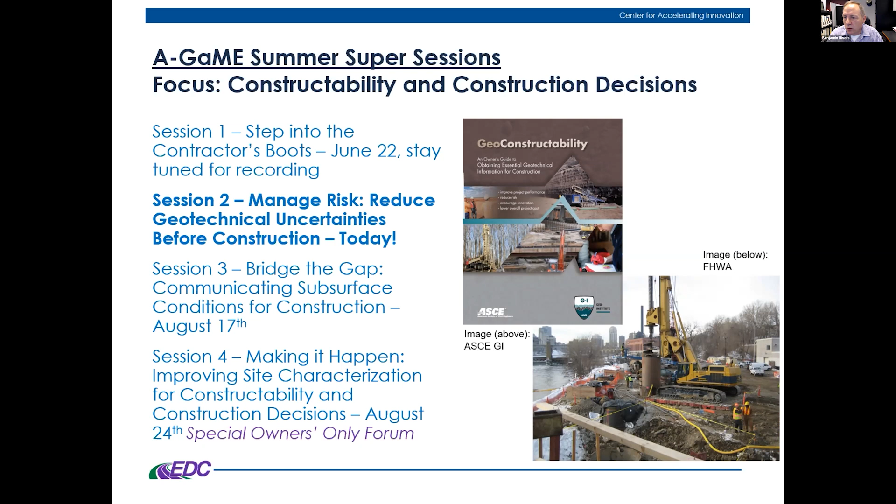We do have a few coming up: bridging the gap on communication, communicating these for construction needs, and then finally a forum that is specific to owners - it's really a workshop atmosphere where we're going to find out where our gaps are, where we need to improve our processes and procedures so that we can incorporate these construction needs for our investigations.

So for today, what we're going to be talking about are those common problems that we do experience during construction related to geotechnical uncertainties, and some of the problem-solving applications, the characterization of our conditions using A-GaME technologies, and then case histories that illustrate these points for both A-GaME technologies and the types of problems that we have.

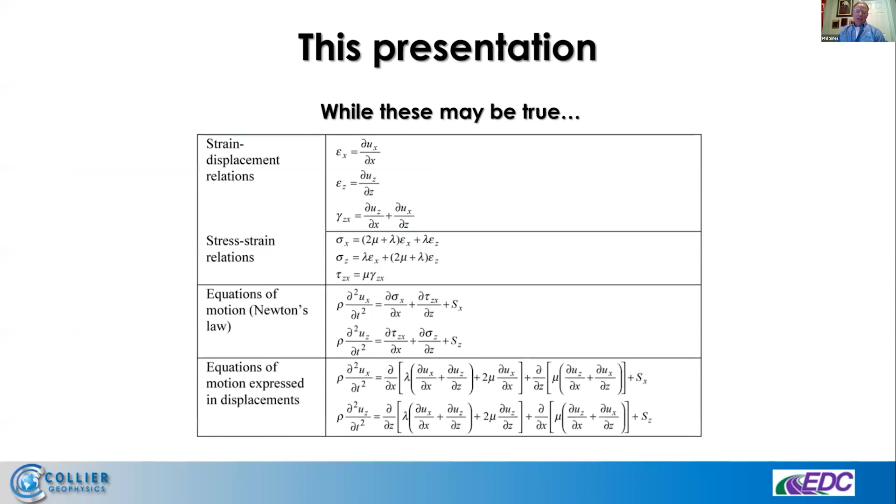The real key is, where are we going? What's the goal here from 2022 going forward? We're talking about a couple of decades of getting to the point to reduce uncertainty in geotechnical investigations. I'm going to get into several of the formulas and how we get there, but no, I can't do that in 20 minutes. I don't intend to, but we do know the physics is there. We do know it hasn't changed.

What's changed are three things I'd like you to be aware of. Our hardware's gotten better, our software's gotten better, but the key is our digital recording and our digital visualization and presentation of results for you, the designer, to incorporate geophysical results into all your programs, whether it's ArcGIS or any other 3D CAD. All the programs out there, we can give you data to put into it. I think those are the biggest changes, not the physics.

So I'm going to spend just a little bit of time on a statistical perspective and some corollaries, and then I'll get into those methods. I'm going to tie those methods into what we know as uncertainty as geophysicists, and then I'll have some applications to back up those methods.

Because in reality, you know, we start on a site, and this is just hypothetical. In this case, it's a quarter square mile, and we're just putting in a 50-foot anything. It could be an old river channel, it could be a dike, it could be a fracture in bedrock or a shear zone or faults and things like that.

And if we assume that site and say, all right, it's a narrow target, how are we going to find it? Well, we drill, or we get cones, or any other excavation intrusive methods. The probability of finding it is very low from the get-go if all we're doing is just drilling and poking and hoping, as I like to refer to it. And we up the number of borings, we up the chance of hitting it. Now we're at 50-50, and that's usually not good enough for constructability and or design.

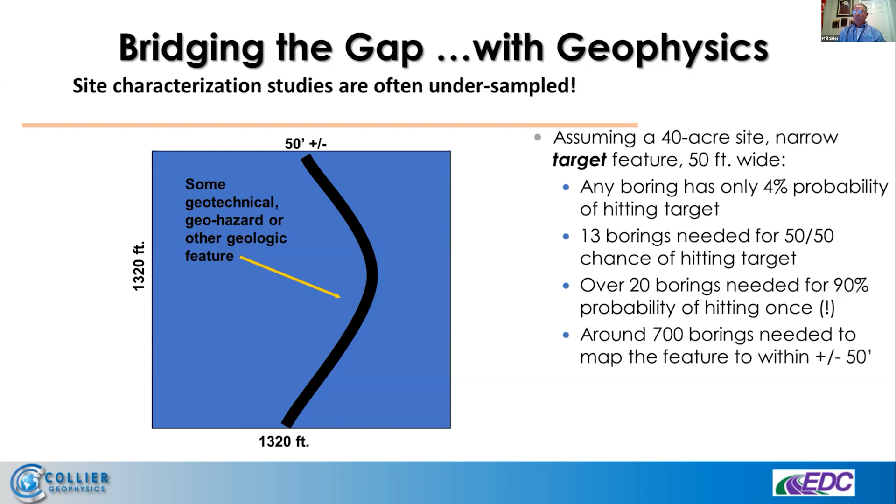We start throwing more borings at it, and okay, we're getting pretty close to at least hitting it and understanding it might be there. But then at some point, yeah, we know we're going to get this. So we're going to drill enough holes and pepper the site, we're going to have enough intrusive investigations. But at this point, it kind of turns into this old corollary we've all seen, the classic blind man and the elephant problem.

And I said, hey, that's out of scope, we can't go there. No, I was teasing.

I explained a little bit about it, and we don't do that today, we don't do that with you, but we know how the physics of these things can come in so that when we analyze the Earth, we know what we're doing is an indirect measurement. I'm not touching it, I'm sampling it with various physics. Those methods of measurement are going to give me properties of the subsurface in whatever fashion I choose, this one being an example of seismic.

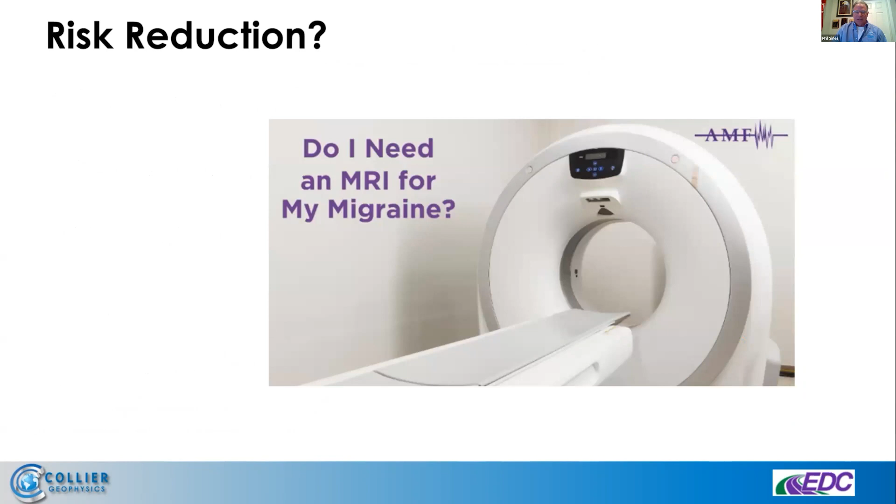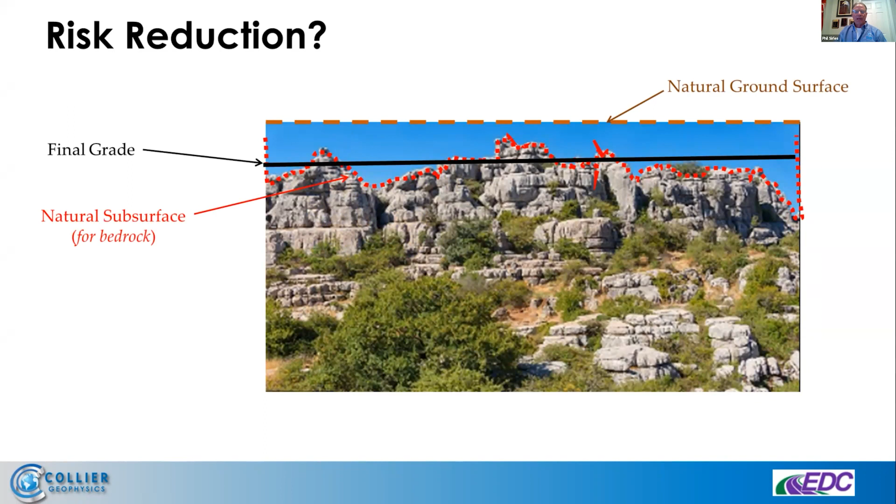So how do we reduce risk? Well, if you've got a migraine, you might say, hey doc, do I need a full-fledged MRI? We don't know. You go to a site and say, do I need geophysics? I'm in karst terrain, what might be there? Well, the short answer is maybe not. But if this happens to be the natural ground surface in a nice flat part of the country, and we say, hey, there is subsurface karst here, we don't know what it looks like. It tends to make a difference when somebody comes up and says, my constructible grade is at this elevation. We have to understand it better before we get out there, because you can look at that and say drill here, drill there. What am I going to do?

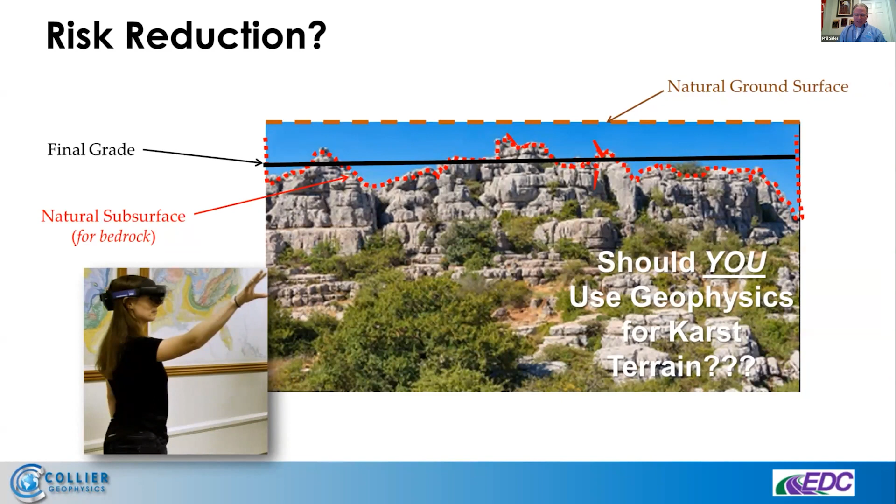So the question isn't, do I need geophysics? It's, should you use geophysics in these kinds of environments, geohazards of any kind? This is just one example of karst. And my short answer is, well, you don't have to. If you're like me, one of my geophysicists here that's got the force, using these geophysical goggles - these are HoloLens - and we are developing with several companies the ability to take our data and get into the models, get into the subsurface, as I like to put it, and see our data. So here's the opportunity to use those technologies.

That MRI is going all the way around your hip, knee, head, whatever it is you're looking at. And they have a terrific starting model, right? Most of us kind of got the same shape, size of head and what's inside of it, and zillions of examples. And they get really quick time differencing—they can do that imaging over and over again in a repeated short time frame.

Well, we don't get 3D coverage. I'm lucky if I get a borehole to put sensors in, or an adit, or a shaft, or anything else under the ground—I'm typically just dealing with the surface. And even as a geophysicist, when I say 3D, often it isn't 3D like you might think a CAT scan might be. I hardly ever have a really good starting model. I say it's rough, because that's why we're being brought in—a borehole here or there, or maybe not yet; they're going to use them afterwards.

And every site is different—let's just admit that. Mother Nature can be pretty tough on us with those changes in site conditions, and those can change even during construction. Just moisture comes to mind, or flooding, those kinds of things.

So the real piece is that when they're used properly, and you incorporate other test results—remember, the doctors do too—then you can start to incorporate them and reduce the uncertainty in your own model. That will help the geotechnical folks and every designer and project manager reduce that uncertainty on your site and the risk for your project. So geodata, and geophysics being one of those, is really where it all can come together. We take anything that's given to us on a site and incorporate it into our data so we can understand what those colors mean.

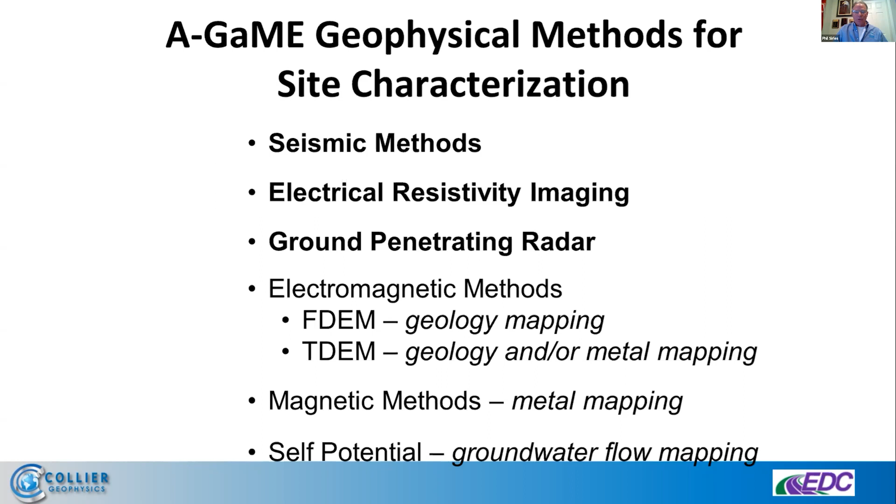So for seismic, I've got a couple slides of basic concepts. We're measuring all the vibrations going on in the ground. We can do that passively by setting out systems and just listening to what I refer to as planes, trains, buses, and cars—the ground is shaking. Oh, and by the way, there's earthquakes and microtremors too. But we do that with sensors, and we can do it in linear arrays or grids.

These are good because they give you, if you're not aware of the phenomenon, an elastic wave traveling through the Earth and the wave fields it creates. There's two types: body waves that travel into the Earth and surface waves that travel along the surface. It's not too hard to follow that intuition.

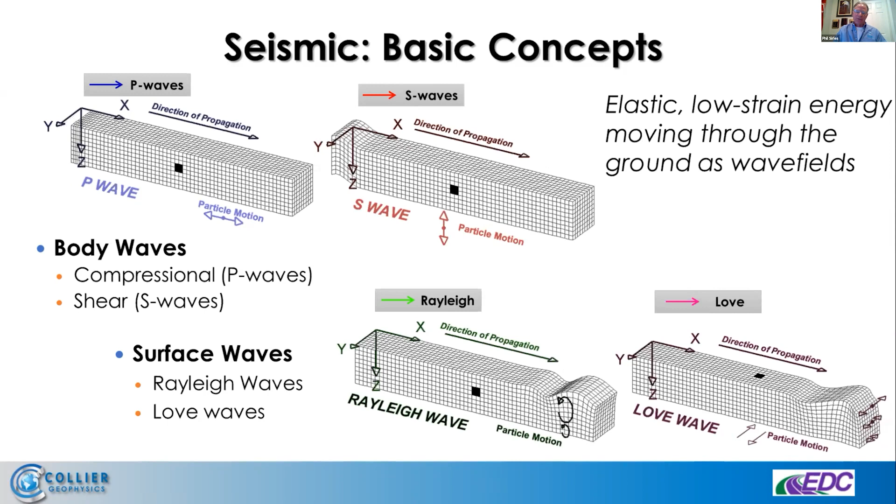Compressional waves travel the fastest, shear waves travel the next speed, surface waves are the latter. Rayleigh surface waves travel at the same speed, they just move the ground differently, one in a vertical sense, one in a lateral sense. We know these, we know the physics, and using these is how we can go out, design a survey, use the right sensors, use the right array, and get the best answers.

Well, the reason any of these work - I'll have one of these slides for each method - is if there isn't a contrast in Earth materials, we can't map it. A hard rock on a hard rock, a dense soil on a stiff clay, those kinds of things that as geotechnical engineers we can't see those contrasts and interfaces if they don't have a change. In this case, going from the really loose, crappy landfill stuff all the way up to steel.

We know how seismic waves travel through water - ask any mariner that's doing pinging for other submarines. So we can use this to start saying what kind of Earth materials and what sort of range of materials, velocities, we might expect.

On the GPR side, basic concepts - this is an old slide again, there are new systems, 3D systems, lane-wide systems. I just wanted you to get an example of what can be done at highway speeds when we're looking for rebar and cracks in concrete, when we're looking very deep with these low-frequency systems. A colleague of mine in Boston went to 130 feet last week with one of these. These are also geologic mapping tools.

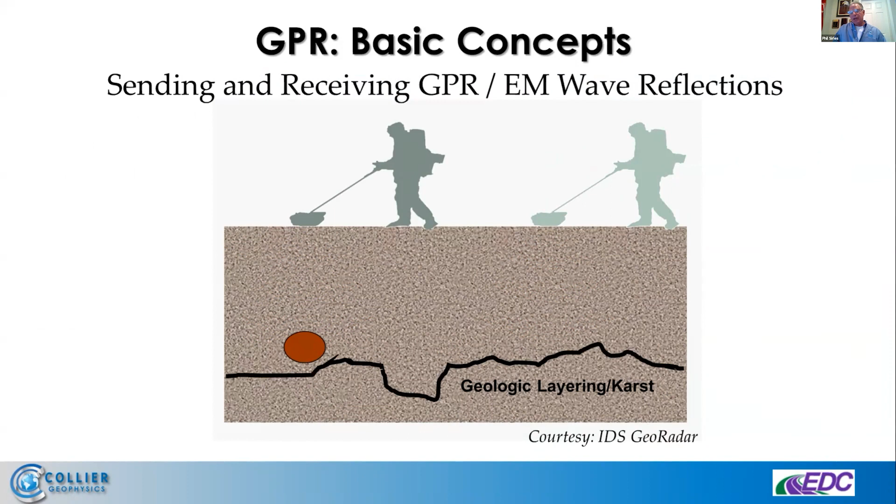It too has contrast - they're in dielectric constant. Not something most people are familiar with, but we have it basically set for extremes from a 1 in air to 80 in water, and Earth materials are all in between.

The best way to look at this is from good materials to use radar in, to bad materials. I've used the phrase - I've been wrong because the clay is not a clay - that clay is the death of radar. It's pretty close to being an accurate statement.

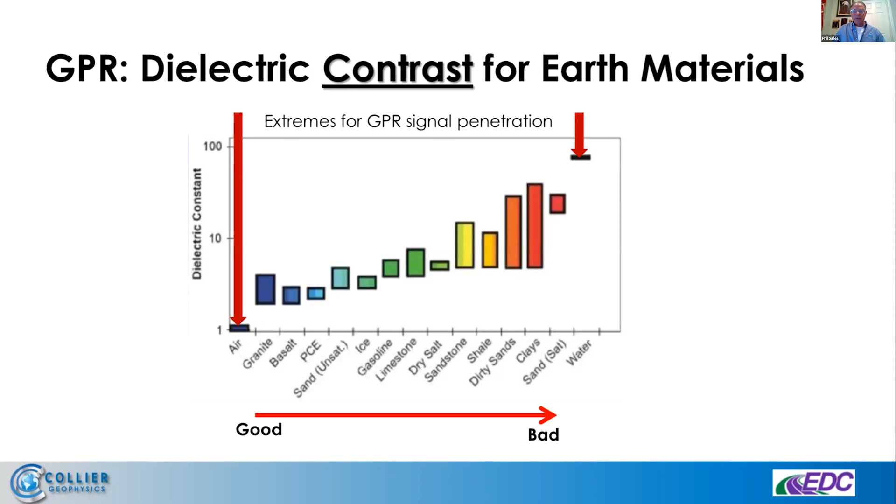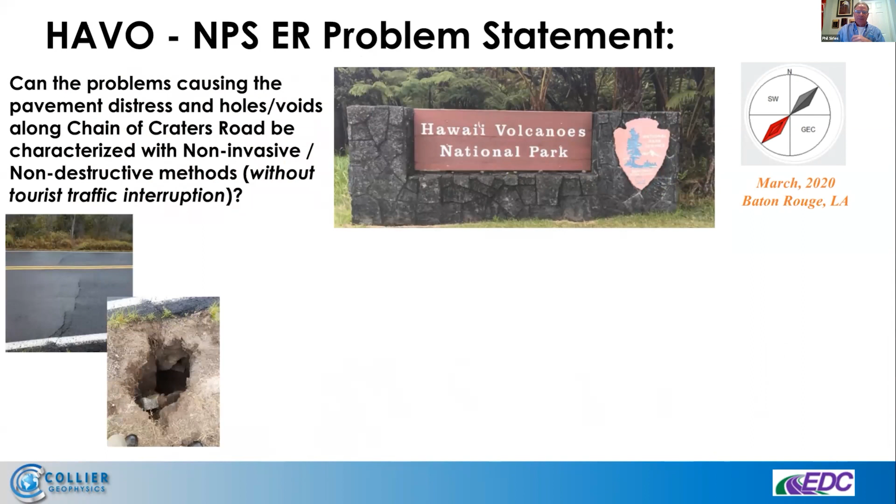So what I decided to do is use a project that was run by Central Federal Lands here out of Colorado. In Hawaii, after an earthquake, they noticed some distress on the roads, some holes that had opened, and they needed to quickly get after a fix. Also, all my presentations - before I forget - this was given at the Southwest Geotech Conference. These full site case histories can be shown to you later.

So here we go. I've got a project with two methods, seismic and GPR. So one project, I'll kill two birds with methods, just kind of showing how they work. Because we had to deploy quick, we had to find lava tubes, we had to do volumetric work, and we had to be cost effective because the smaller - oh wait, that worked for both of the methods. So we went out to 5 different areas.

So the seismic results, unlike the cake show where I tell you what we're going to do and then you get to eat the cake in about 5 minutes, this is the 3D volumetric assessment of this area 2. And this is an anomaly.

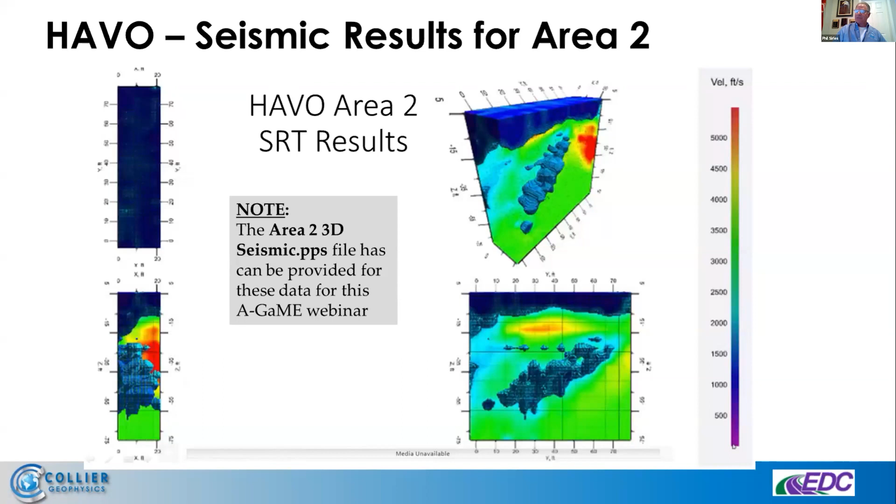It's going quite deep, about 55 to 70 feet, depending on how you look at this and how you smooth it. I'm in cross section here, looking straight up the road, looking down on the surface. The top 5 feet, geophysics isn't real good in that, so it's not a problem for seismic. This is a file I can provide for you, Ben, and everyone else.

At about 5 to 7 feet, we started losing any trace of it, but we could tell it took off in this direction. So in the end, using the GPR for the shallow and the seismic for the deep showed where that void was, right on the shoulder at the white line, open, and we could stick a tape in 25 feet, extending much deeper and across the entire roadway.

So the results here were useful for Central Federal to move quickly. My former friend Camise, who worked on this project, said they got it done in less than 30 days from when these distress features showed up. They didn't drill it — they used the geophysics to make a design and get this thing back open and safe for the public.

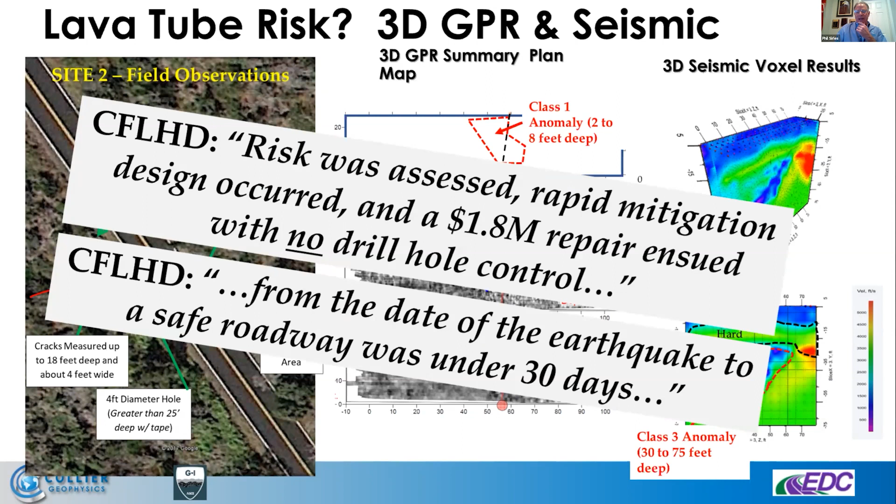One more quick example of seismic, and I'll be running out of time here — I see Ben, I'll go quickly. This is a recent project in March with snow on the side of the road along I-70, just west of where I work, for a wildlife overpass.

A bridge is going to be built and borings were done, but the borings were pre-designed, so they weren't sure where the foundation elements might be. So we did some seismic.

Here, passive testing used trucks and a front-end loader thumping the ground. We used shear waves to show that if you're just using refusal and blow counts, it probably wouldn't be much different whether you're going to be able to found your elements outside of where the existing borings are.

This quote, 'between, below, and beyond,' comes from where Ben works, in the southeast center, from a gentleman named Barry Berkovitz. I've loved that phrase forever — between, below, and beyond boreholes. This is an example of that.

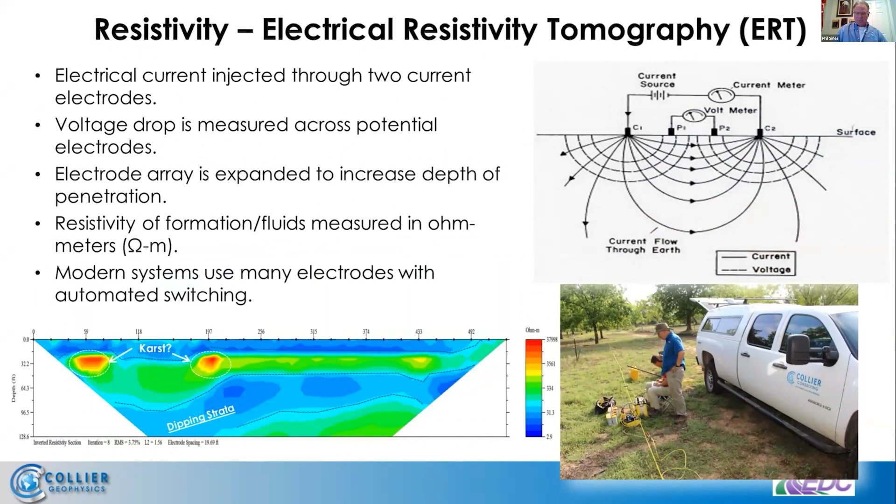Resistivity — I'm sorry, I'll run over time a little bit, Ben, I want a good example. We inject current with a couple of electrodes and receive with a couple other electrodes called voltage potential. Then we can map features in the ground using systems that can cover miles a day in some circumstances. But they all rely on a contrast in earth materials, or this wouldn't work. For those used to resistivity, the inverse of that is conductivity.

So we have changes in material contrasts. That is why it works.

So this is a project that I presented at HGS many years ago, looking for karst in Oklahoma on Highway US 412, separated by 2 counties. We were looking for these zones of

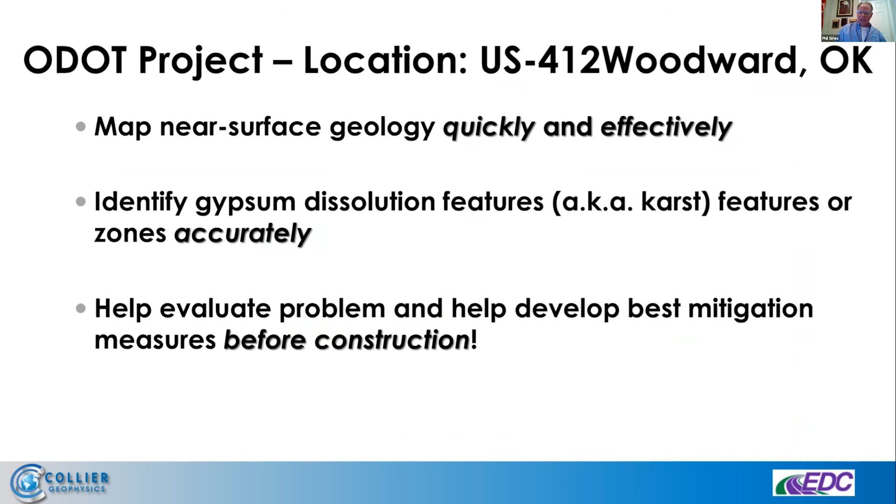gypsum dissolution, and it was being done so that we could find how they could take a 2-lane road into 2 separate 4-lane passes.

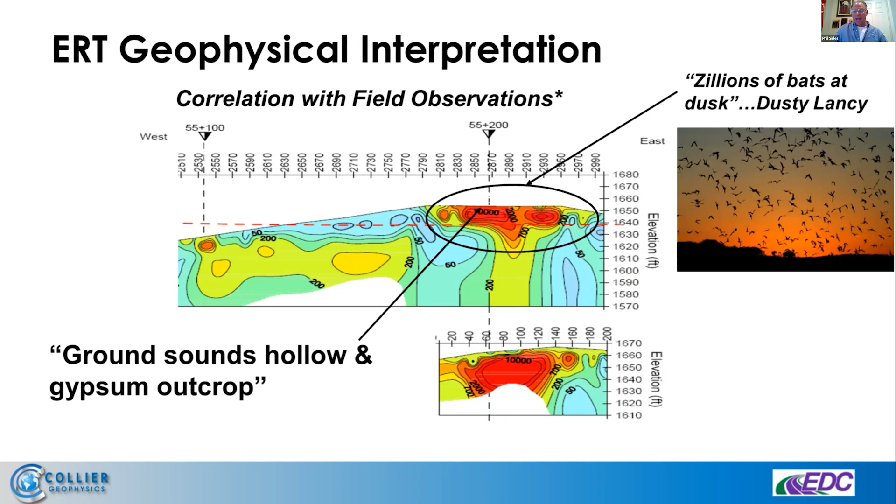So the key for us was to get this data, go through some geophysical pieces of statistical analysis with the geotechnical information, come back with a more easy solution to utilize and understand.

So my last couple of slides here, this is where I think the A-GaME is going. This is an active initiative by the Corps of Engineers to say, we've been using geophysics over here in all of this part for a long time. Maybe we ought to think about bringing it up earlier into the process.

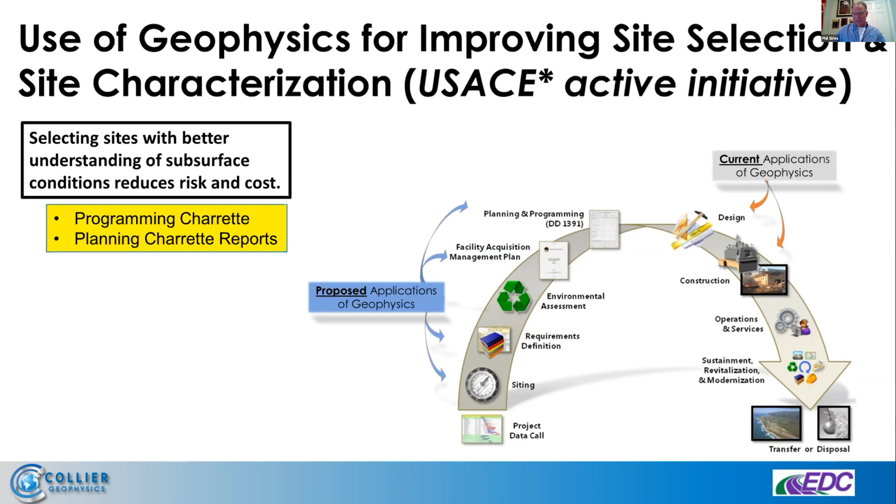Environmental did this in the 90s, right? It was over here as well. When you hit something like a wetlands, you kind of dealt with it during that project. Now you can deal with it earlier on in the programming charrette or early in the planning reports. And I think that's a real key, and it's a good tie to what the A-GaME is doing right now.

Lastly, I just say, hey, you've got to work within a budget, but I think we all have to plan as if unknown conditions might exist, as the owner at this site where a dam was built thought they might exist. So sure, geophysics should be used. I'm a contractor, so I would always say that, right?

But for large areas, if you need continuous information and you only have a few borings, you've got to optimize where to drill further and reduce uncertainty. These have to be used when you're in rugged terrain, wetlands, and environmentally sensitive areas. So there's a reason I say yes, use geophysics, but I believe the reason is really to reduce your uncertainty and lower the risk to project scope, cost, and time.

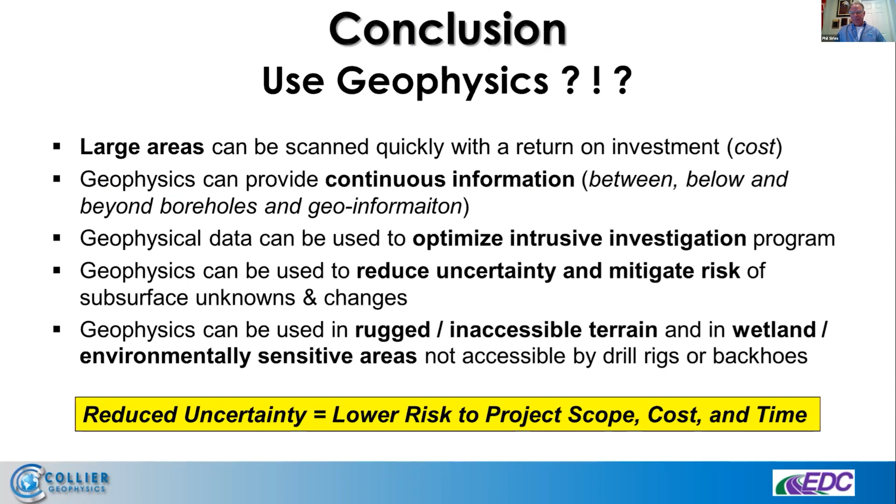So I'm sorry I'm a couple minutes over there, Ben and crew that's following me, but I do appreciate the opportunity to share today. I hope I hit the notes for a few of you that make this understandable and usable on your projects.

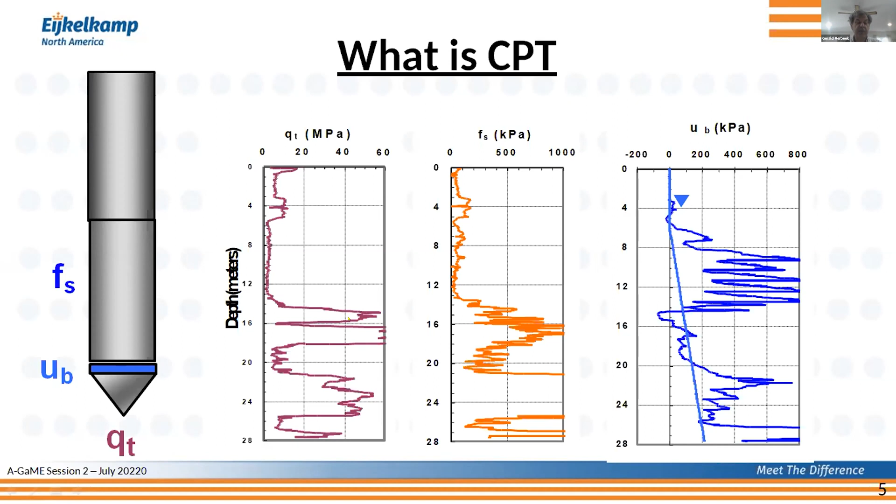You see every single detail, not a data point every foot or every 3 or 5 feet. No, every centimeter, every 0.4 of an inch, you get a data point, and that means you can really catch everything that's going on. As you can see here in the tip resistance between, say, 14 and 16 meters, you have this high tip resistance. You can actually notice that. So what do we do with those data points? We basically look at them, since we have three data points, most of the time initially in groups of two.

Now, to me, that makes perfect sense. I don't necessarily need to know what the soil is. I want to know how the soil behaves, because when you put a foundation in the ground, that foundation cannot look or feel or touch either. That foundation derives its bearing capacity from the behavior of the soil. So it makes perfect sense that we start looking at how the soil behaves rather than anything else.

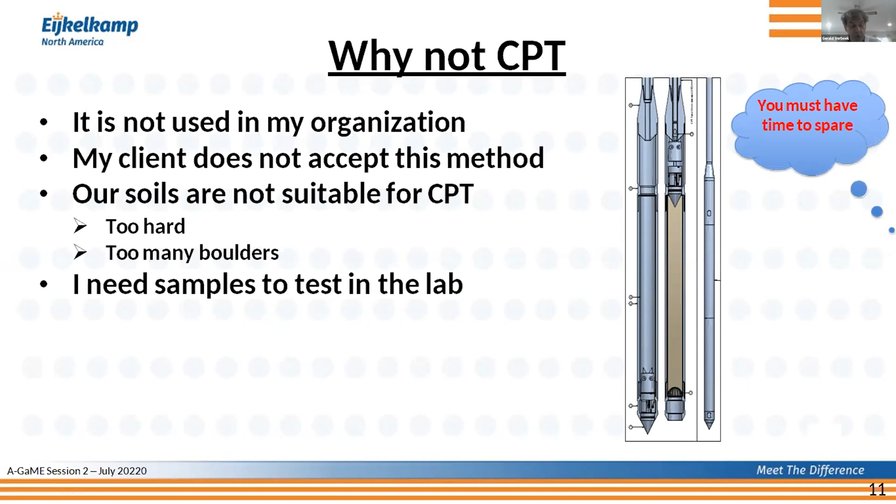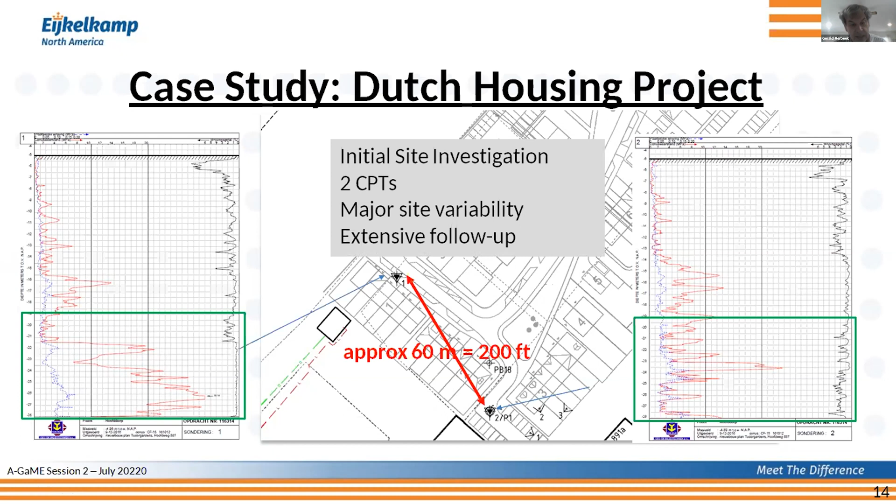Yeah, let's have a decent amount of CPT. Now, mind you, every one of those CPTs will take you roughly about half an hour to perform. But they agreed on doing 22 CPTs, so about 11 hours worth of work, a day and a half or so. And the conclusion, unfortunately, was that when you start looking at that red line, if you take those CPT soundings and put them side by side, you get something... I'm going too fast, let me go back here. Red line, if you put those soundings side by side, you're seeing there that there are lots of question marks, you really don't understand how the profile is going.

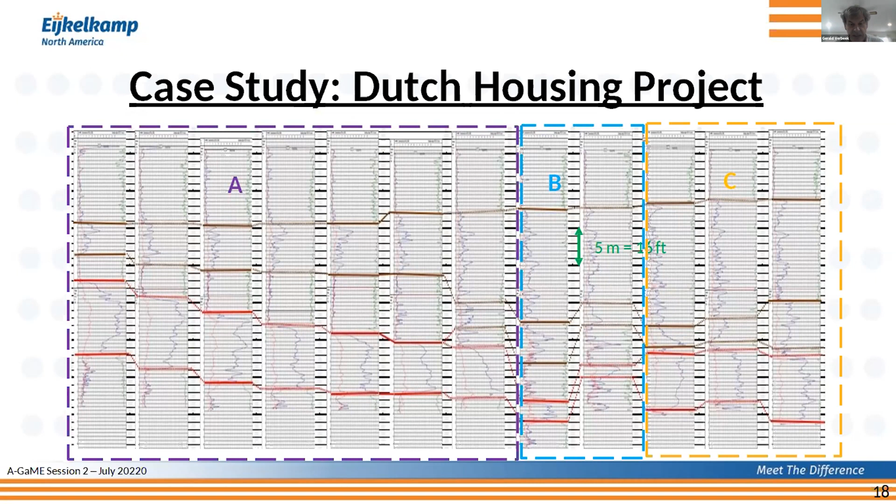But remember, the data could be sent straight away to an engineering office. You can look at it in real time. And based on that, before the guy demobilized, it was said, nope, we're going to do some more. In the end, they did another 22 CPTs for a total of 46, which basically means you did 1 sounding for every 400 square foot. And with that, we were really able to come up with a very good understanding of what the soil profile was there. Very detailed analysis, but with the information available pretty much straight away.

Because of the analysis, we could identify three different zones in that small area. Area A had a very clear soil layer—here the tip resistance is shown, with a clear, thick layer where you can put your piles in. Area C has the same thick layer, but deeper than in area A. In area B, there's no layer suitable for end bearing, so it's all friction piles. But now we know what we have, so we can design the piles and everything goes smoothly.

Let's assume we had not done this extensive site investigation. Let's assume you did your borings, and three weeks later you get the lab results, and it's really not a good time to go back again. What would then be the case?

If you had based everything on location A's data, you would have assumed that already at this depth you start having a load-bearing layer. Therefore, most of your piles would have been too short, resulting in foundation failure. On the other hand, if you had based it on location C, the opposite would occur—most piles would have been way too long, so you'd over-design your foundation and also have problems with pile installation. That brings me back to the construction manager.

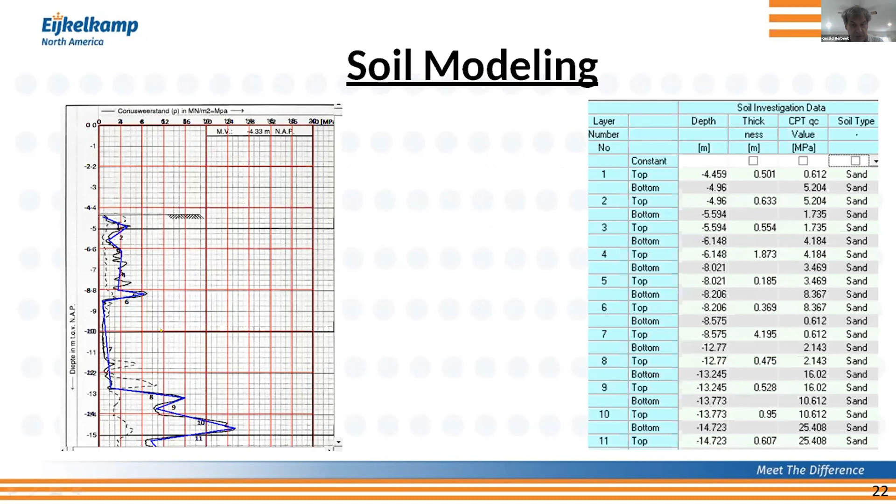So we talked about doing CPT during site investigations. You can utilize your CPT data for foundation design—you don't need to go back to N values, you can use this as direct input, but in the interest of time I won't go into that now. You can also take your CPT data and use it as input into a pile driving simulation program to get your blow count.

That means before you go to a job site, the construction manager already knows what blow counts to expect. If there's a large deviation, it could be that the hammer isn't working properly. Or it could be an unexpected event during construction—say you designed for C, meaning the load-bearing layer only starts there, but you're actually in area A, so you start having a much higher blow count around that depth than anticipated.

And then what do you do? My suggestion is to always have a CPT truck, a CPT unit, on the job site. If you come up with something unexpected, you just push a cone—you don't just look down, ponder, talk about it, and have a meeting. No, you push a cone, and 25 minutes later or so you have your answer and know what's going on.

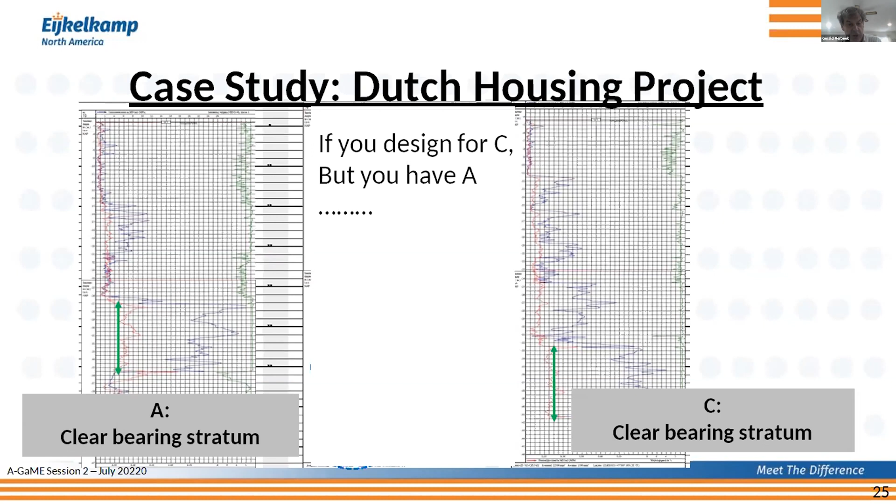So, in other words, what is CPT? In my opinion, it's an efficient and exciting soil investigation method that generates a continuous profile, ideally suitable for all phases of a project.

But quite often I get the response: 'Oh yeah, Gerald, really? I'm not convinced. There are still some things I think we need to do slightly differently. I still have some questions.' So in the last part of this presentation, I've gone and looked at some of those questions to try to address them.

The first question that always comes up: 'CPT, but I'm used to geotechnical borings—how do they work in relation to geotechnical borings?' Well, they're similar in that you get a soil profile, but different in that when you do a boring, you get samples, might look at them on the job site, but generally send them to a lab, get them tested, and a couple of days or weeks later you get results. With CPT, you have the results right then and there, which means there's also no phased execution.

You don't have to send it to somebody else, or have someone look at whether it's a silt or a sandy silt. The correlations we have immediately tell you how the soil behaves. You have no cuttings, no spoils, and especially in areas with contamination where you'd otherwise have to handle the soil brought out of the ground, that can be a tremendous advantage.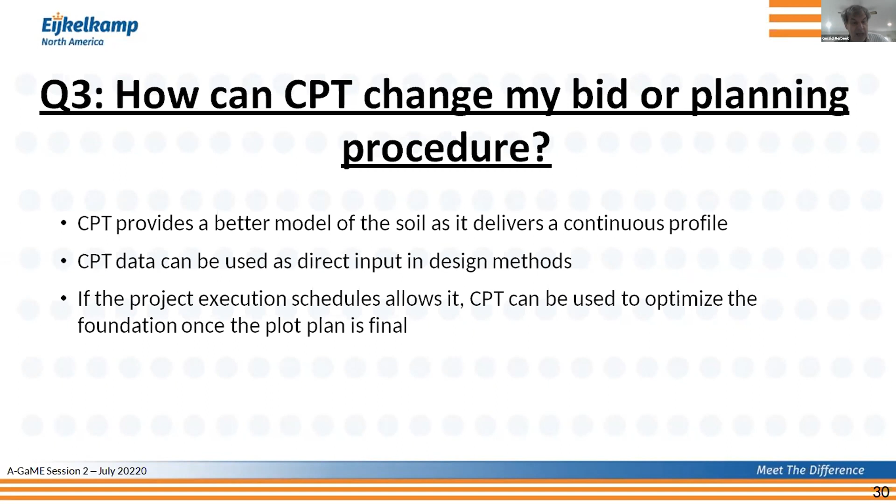Does it change my planning procedure? Yes, because it provides a better model - a continuous profile. It also helps because you can use CPT data directly as input in your design methods. Quite a few states now have methods where you can utilize CPT data directly for foundation design. As I said, it can help optimize the foundation if the schedule allows additional investigations once your site plan is finalized.

When should it be done? Obviously at the very beginning before detailed design once the plot plan has been finalized, and during construction - in all phases, not just during the soil investigation part of the project. In all phases, CPT makes sense.

Does it impact construction activities? Not really. You need to be out of the way because the truck takes some room, but other than that it's not necessary to do anything differently. You can continue your soil investigation and construction activities as usual. Only when performing seismic CPT, where you put a seismic sensor behind the cone, may it be necessary to briefly stop some activities. But basically you can continue with your activities.

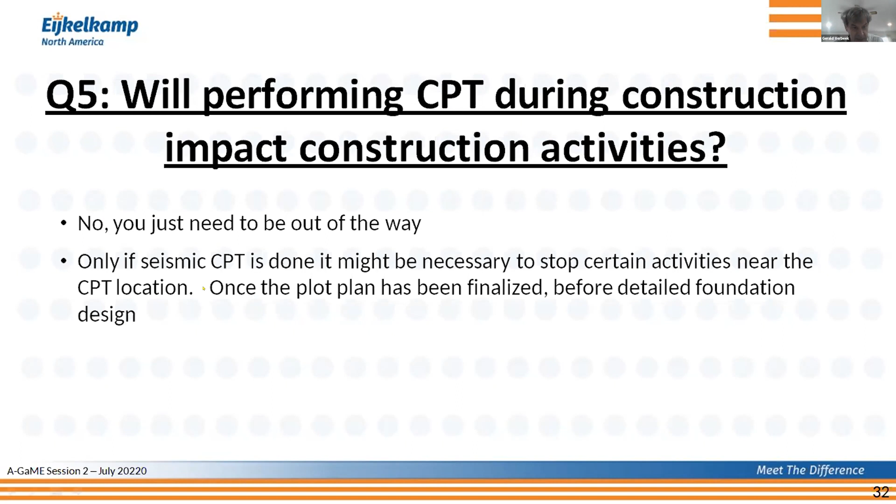Safety aspects: the biggest thing is you generally have a large 20-ton truck, so you need to figure out how to move it to the various test locations and pay attention when it does move. You need a suitable working platform, and most importantly, you need to know where the underground services are.

While CPT tells you what is underground, we need to make sure that we don't hit a water line, which creates a fountain. Not all that bad, but not something you want to do. An electric cable is a little bit bigger problem. And then the worst part, of course, is when you hit a gas line, because then you can get an explosion. So always know what the underground services are. And when you are on a contaminated site, your cone may come out of the ground contaminated as well, so you need to pay attention to those hazards.

Finally, can we perform CPT in-house, or should we get an outside contractor? Oh no, you can do it in-house. It's a very standardized process, and that's the beauty - anybody can do it because there are very few things you can alter. It tells you what size cone to use, how to push it into the ground, and what to do before and after sounding with calibration. Everything is finalized. It does require a capital investment, but instead of getting a full 20-ton truck that can do all your CPT work, you can go small and make sure you have something available that can do most of the work.

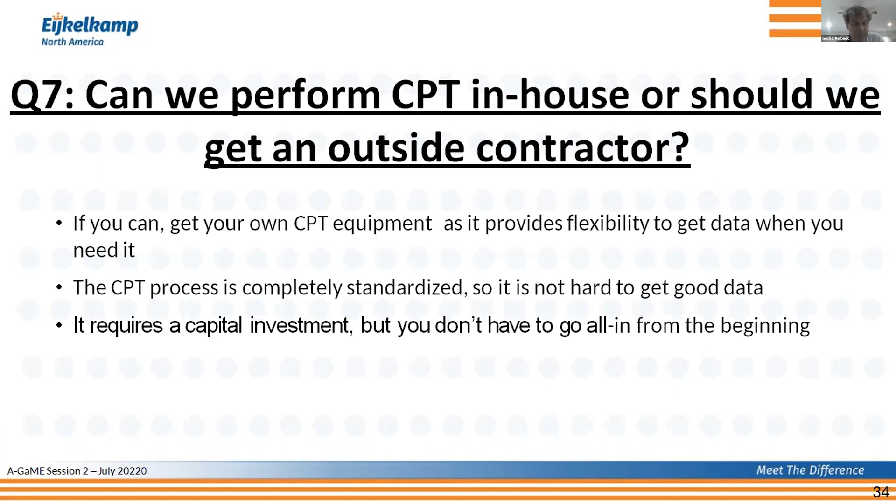So those are most of the major questions. I hope with that I have convinced at least some of those people that were reluctant, that it's an efficient and exciting soil investigation method that generates data essential for smooth operations on a construction site.

In the last minute, I do want to say a little thing about the CPT users group. Ben already alluded to that, but Phil should have done the same. Federal Highway initiated some geo-industry CPT users groups. Phil is chairing the one on geophysics, I'm chairing the one on CPT. We meet monthly, the last Tuesday of each month, we talk about CPT at 3 p.m. Eastern time. Please feel free to join there - you may become a cone yourself, that's the risk. Hopefully you get enthusiastic about CPT, and hopefully with this presentation I've achieved at least some of that as well.

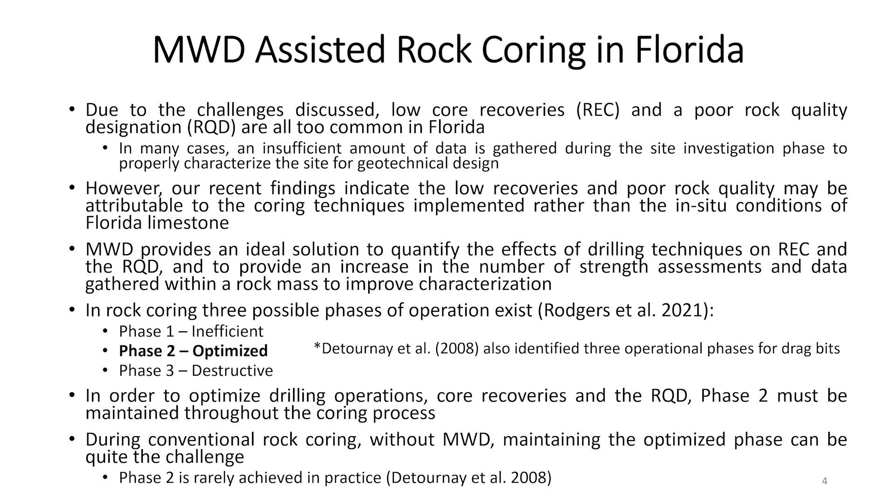Now with conventional coring, when we're not using MWD, maintaining this optimized phase can be quite challenging. However, with MWD, we can develop drilling guidelines and procedures to ensure that we're only using our drilling tools in the most efficient manner, staying in that phase 2.

And when we do this, the characterization is reflective of the strata encountered, and it's not influenced by our drilling techniques. A significant benefit to this is that we can reliably assess rock strength in situ during the drilling with high resolution. So 1 or 2 centimeter scale is what we're talking about.

However, in order to measure rock strength in situ and to optimize our recoveries and RQD, certain drilling principles must be understood and followed. We call these the operational limits of the drilling tool. Through our studies, what we found is that interdependent relationships exist between each of these drilling parameters, and these relationships must be considered to achieve the most efficient drilling practices.

And so this introduced a new concept of operating within optimal drilling parameter ranges based on these interdependent relationships that happen to be unique to the geometry of our drilling tool.

So using MWD, these optimal parameter ranges can be identified for each one of our drilling tools that we use out on a site, and they can be maintained through MWD throughout the drilling process. And when we do this, we get exceptional results.

And on the right-hand side, this is a great example of this. So for the particular core bit that we're using, we determined these optimal parameter ranges. And during this core run, we maintained these optimal parameter ranges.

So basically we set our control drilling parameters within the optimal ranges, and then we didn't change a single thing throughout this core run. We didn't have to make any adjustments to our controlled parameters.

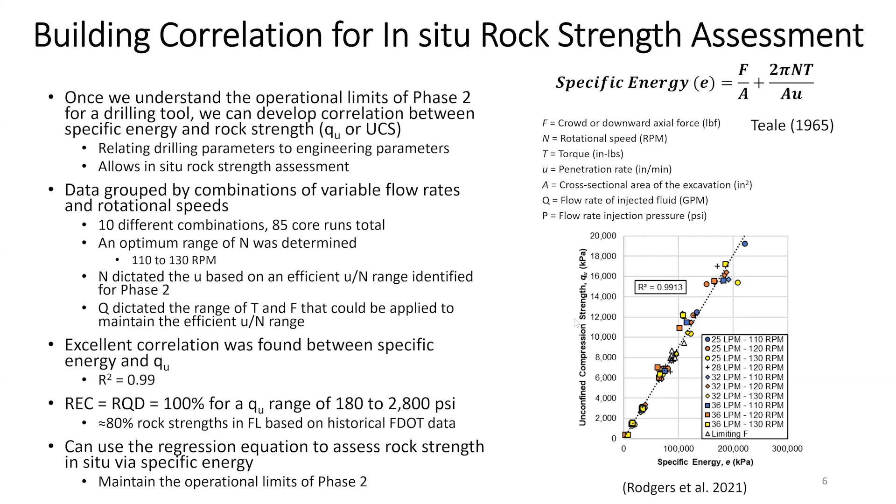What's great about this regression curve and the equation that comes from it is that when we're actually in natural Florida limestone, we can use this equation to assess rock strength in situ, as long as we're maintaining these operational limits. As we're coring down, we'd get a value of, let's say, 100,000 kPa. It goes up and hits the curve, and we can estimate that data point is about 9,000 kPa for unconfined compressive strength.

This is an example from natural Florida limestone in Perry, Florida, where we're using a double wall core barrel with the same core bit we used in our controlled study. MWD produced a continuous high resolution strength profile to identify layering at each one of these borings.

In the middle here we can see boring 5, the strength profile from boring 5. In blue is MWD - this is the unconfined compressive strength measured from MWD. The orange dots are the core samples we sent back to the lab that were tested.

For this one single boring, we had a dry unit weight range from 100 to 165 PCF, a moisture content range from 0.7 to over 20%, and an unconfined compressive strength range from 66 to 6,300 PSI.

So basically we encountered the entire range we expect to see in Florida in this one single boring, where we had a mean recovery of 92% and mean RQD of 75%. If you're familiar with Florida coring, this is very unheard of - to achieve these types of mean values over the entire boring length.

What MWD did was optimize the recoveries and ensure RQD was reflective of the strata encountered. In fact, our lab technician commented that he had never seen so many competent rock samples sent back to the lab from a site.

At this site we also sent out one of our other drilling crews from a different district - a very well-experienced driller who's actually taught me quite a lot about rock coring and geotechnical drilling. We had them go out and perform rock coring without MWD.

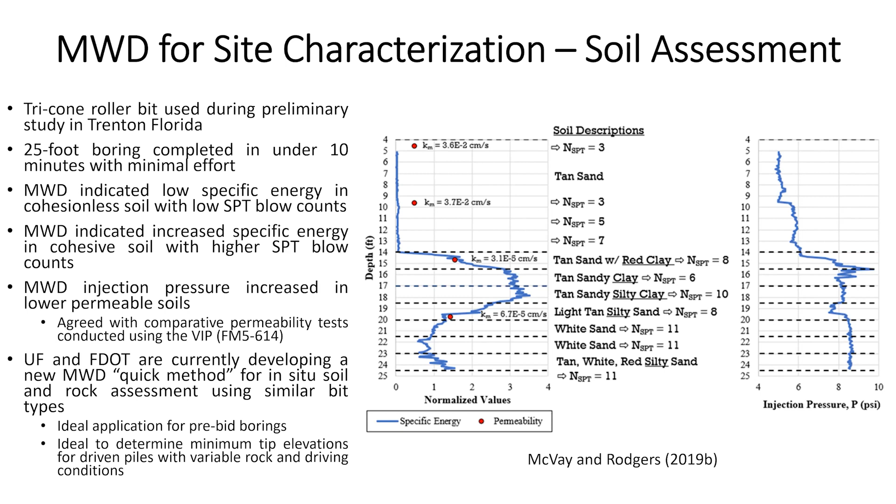UF and FDOT are actually currently developing a new quick method for MWD for in situ soil and rock assessment using similar bit types, and I think a few other states around the country are also pursuing this. So we feel this is going to be an ideal application for pre-bid borings. We also think it's going to be ideal to determine minimum tip elevations for driven piles with variable rock and driving conditions. So one of the biggest challenges we'll face is developing MWD in situ soil assessment.

We'll be relating these drilling parameters to conventional soil engineering parameters like we've done for rock. However, we're already seeing agreement between MWD and conventional site investigation methods that are commonly used for soil characterization and design. This is very encouraging.

So now I want to switch over and talk about the bored pile construction QA/QC side. This is what Dr. Dave Horhota likes to call the low-hanging fruit of MWD.

It's because a lot of these drill rigs that we use to install drill shafts or cast piles already have all the sensors we need to perform MWD already installed. So that's what I'm showing on the right-hand side here. I've simply tapped into the electrical unit and I'm collecting the data I need for MWD, and directly behind this electrical unit I've mounted my junction box for MWD. It's clean, it's a low footprint, and it's not disturbing the construction process whatsoever.

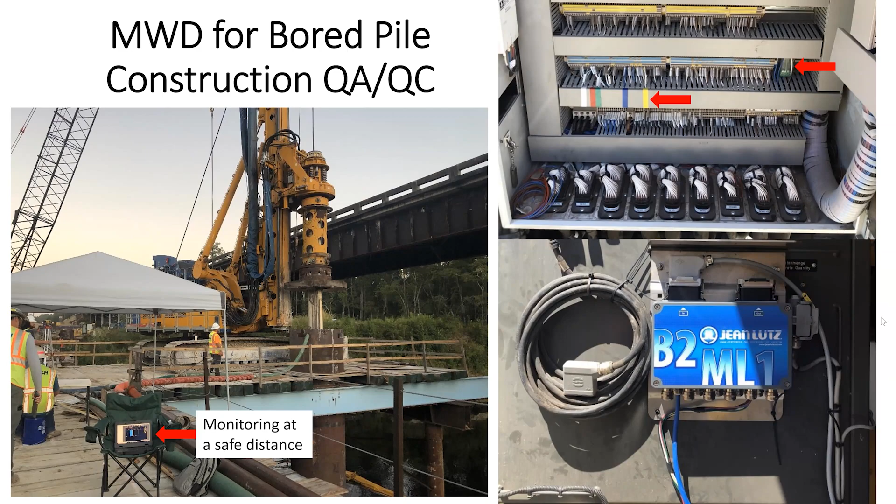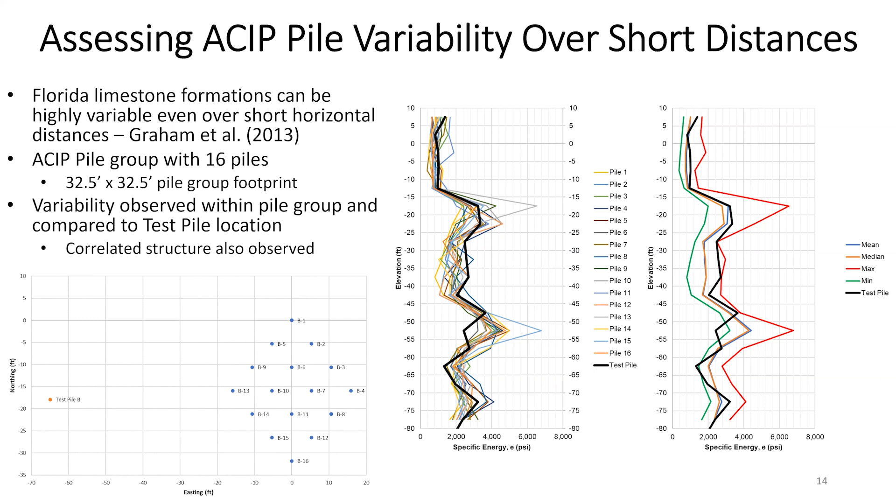So we want to know how well our test pile, 65 feet away, related to all of our piles within this pile group. We do see some variability within the pile group compared to the test pile location; however, we're also noticing a correlated structure. The test pile didn't always follow the mean or median value from all the drilling that occurred within the pile group, but it generally fell within the max or the min. So that makes us feel good that this load test is probably going to be representative of this specific location.

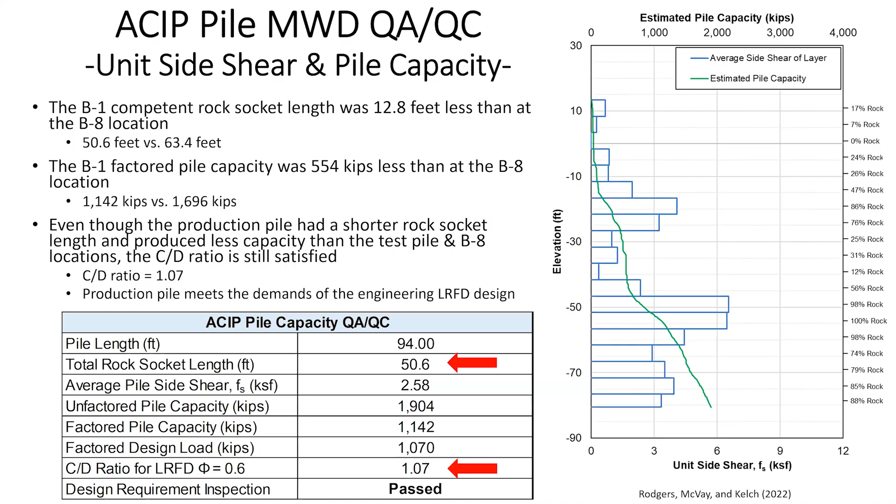So one thing we've recently done for the FDOT is develop an ACIP pile QA/QC analysis tool where we can input custom drill rig specs, and it automatically updates this analysis tool. We can assess specific energy, and we can assess unconfined compressive strength and side shear when we have correlations developed, and we get an incredible amount of information that's immediately generated from this.

And we also get a drilling profile that tells us where we were efficiently drilling, where we went wrong, and where we can make improvements in the future. Our current initiative is to make this information more readily available to stakeholders in satellite locations, to speed up and improve decision-making when problematic site conditions are encountered.

And I'm probably out of time at this point, so I'll just leave these conclusions up here.

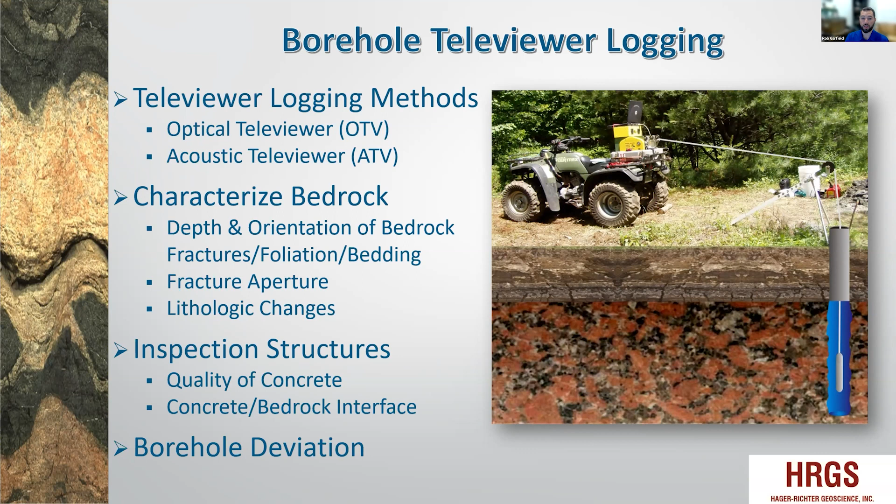Why do we care about this? Many times you have an outcrop before you put a rock cut in, or you can see some of the rock. If you want to characterize that material where the actual cut was going to be, you want to actually look at that material.

Let's say the cut is hundreds of feet or a mile back. You want to look at the material where your project is, and get the best in situ understanding of that material. If you don't, as you start to do a cut, you might have big rock falls, which can be dangerous to people on an excavator or on the roadway. And if you just core, you might have large areas with no recovery or it's completely chewed up, and you don't know if that's the natural material or somewhat drilling induced.

Also, geology changes drastically over short distances. You can see just over a matter of feet here, you have a fold in the rock. If you looked at a surface of the rock right here, but your rock cut was going to be back on this face, your orientations have completely changed. So when you're doing rock slope stability and different kinematic analysis, it's completely changed. So again, if you can put the boring in at the location of interest, you can get those true conditions right there.

This is kind of a nice flow, the way these presentations were given. You started with the surface geophysics, which can be done on a reconnaissance level as a very initial step to understand your depth of rock, overall properties of the materials, the velocities, where you have faulting and things of interest, so you can focus where to put those borings, where to do your MWD, where to do CPT.

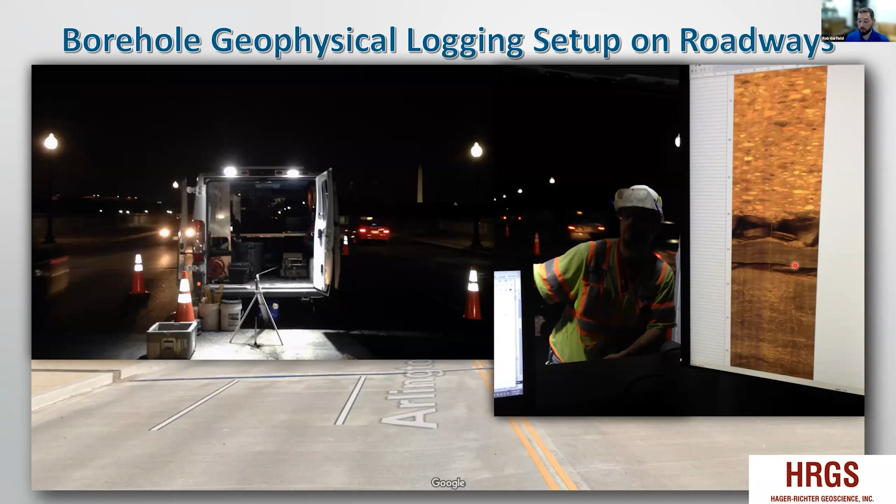And then you get the data live. As was discussed during the MWD presentation and the CPT, you see these images live. You can see the bottom of the concrete abutment for the bridge, and this large open fracture zone where the concrete should have been in contact with the rock, as well as some natural fracturing. This comes up live, and there's much more you could do back in the office with it, but you do get that initial understanding of the material right away.

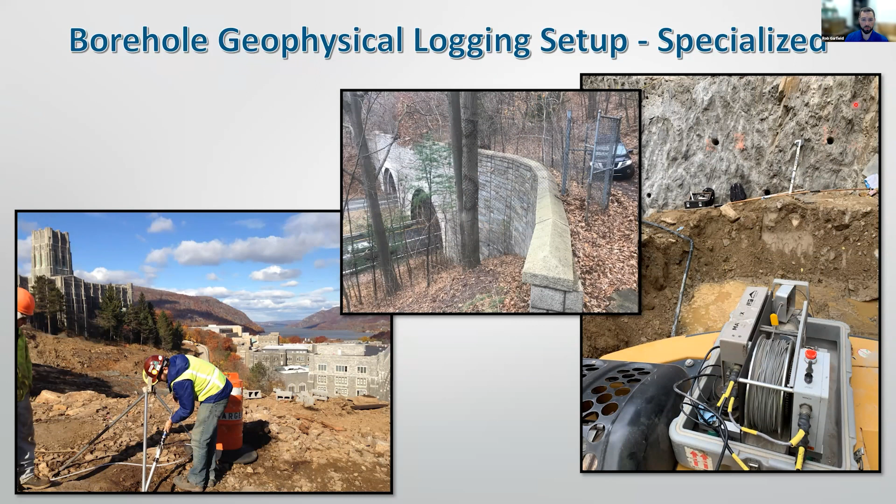The direction of the bottom of the fracture, since these images are oriented, gives us the dip azimuth, which is 90 degrees from strike of a fracture plane, bedding plane, or foliation plane. We also measure the angle and direction of the borehole, so aside from giving you borehole deviation information and understanding where the borehole is located with depth, we can correct these orientations to true orientations.

When you look at a rock core and see what you think is a horizontal fracture, that actually is a fracture perpendicular to the axis of the borehole. If the borehole is vertical, then it is horizontal. But if the borehole is off vertical, you don't know the true orientation of that structure. With the televiewer data, the orientations plotted out for later kinematic analysis or to better understand true recoveries and RQDs are corrected for any borehole verticality or deviation.

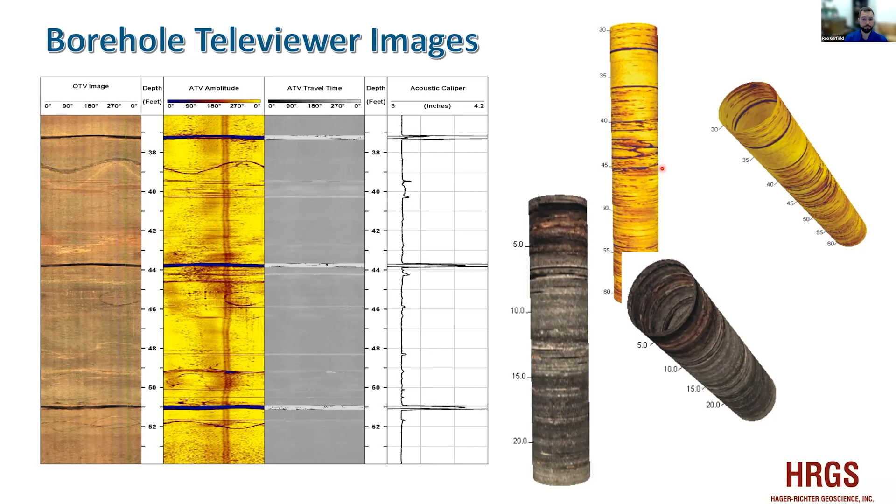Just to show how high resolution these data sets have gotten, we're well over 150 to 200 feet deep in some of these images here in water. These were 4-inch open bedrock boreholes. You can see that when these were drilled, you would have lost all recovery, had no RQD, and had no way to understand if this is a void, if there's rock there, or what the orientations of these structures are. You can see the changes in lithology. In this case, they didn't even core, so the televiewer data was the sole way of representing what the material looked like.

Here's some optical data next to televiewer data. That previous slide was from some igneous rock, and this is in some sedimentary bedrock, again showing the open features, the orientations of those structures, and any lithologic variation.

Of course, there are limitations to the methods. You need a borehole to do it, but for the optical televiewer, it works in air or water within that borehole - if there's water, the water has to be clear. For the ATV, it only works in water. In this case, you had water just past 14 feet, so the ATV data doesn't start until 14 feet, while the optical data is present throughout because the water was clear.

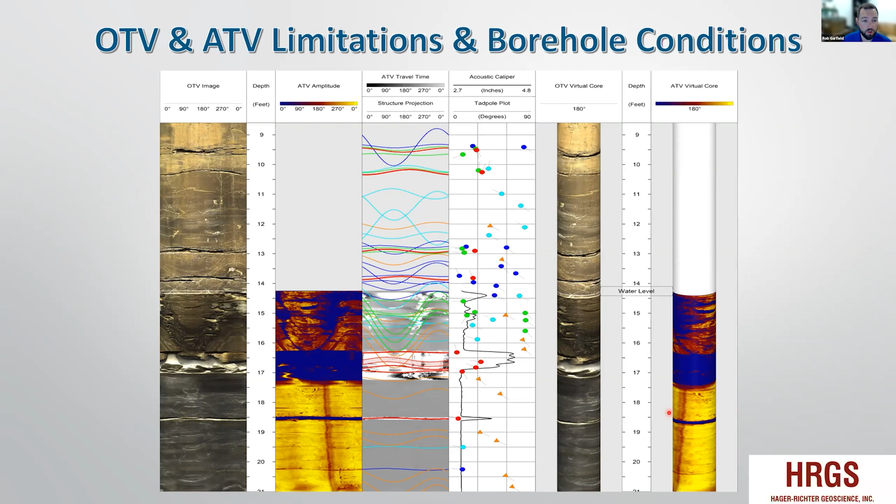You could see some infilling on these fractures, and these colored lines represent the fracture orientations, which are later plotted in Excel so you can pull them into different geotechnical analysis software. By running both the optical and the acoustic, you have the kinematic analysis and fracture orientation information throughout the entire borehole. In this case, it's the flip.

So ultimately, you can plot those fracture orientations and the bedding or foliation orientation, and understand that you have a primary fracture set that's parallel or subparallel to bedding, and a secondary fracture set that's steeply dipping and roughly orthogonal to the bedding-parallel fractures. This is one of the important pieces of information you need to understand rock slope stability and characterize what's happening in the subsurface, rather than going into construction without this information on something like a rock cut or excavation.

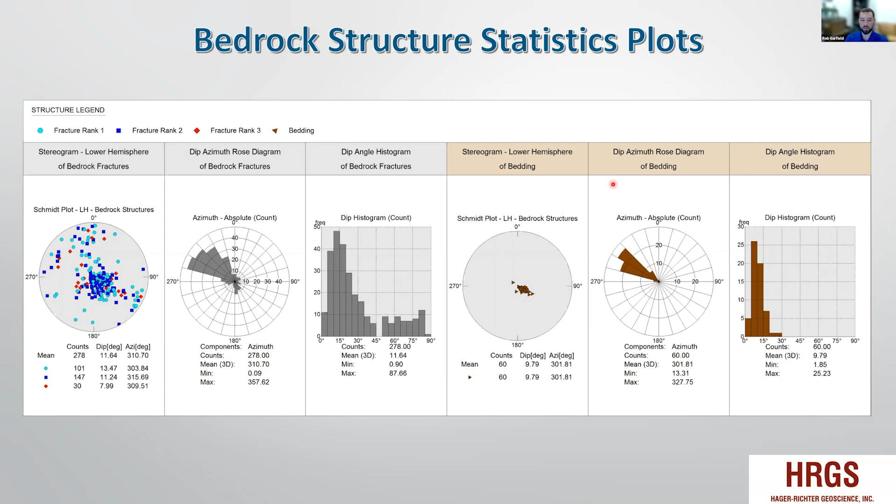Otherwise you run into issues and try to mitigate them in the field. You get this information in advance before construction, and know the true conditions to reduce risk, schedule delays, and costs. You can contour that data. Again, you've seen some of these pictures, getting this data from structures.

So instead of just looking at the rock, now it's the exact same data we've been talking about with the optical and acoustic televiewer, but now we're looking at the in situ conditions of concrete. It doesn't matter whether that concrete is a few days old or 100 years old. If you want to know the true conditions, when you core concrete, it tends to break up and have more mechanical issues even than rock, unless you're in some really weathered material. So if you want to know if the concrete is truly in good shape, is it bonded to the rock, this allows you to get that in situ information.

So you had some weathered concrete here at about 30 to 40 feet, and you had some pretty decent bonding between the concrete and the bedrock, although there was a little fracturing there. When they cored this concrete, it all came back broken up, and they were concerned about the condition of it. The televiewer logging was able to show them it's in pretty good shape. There's a few issues of concern, but overall it's good. And then the natural rock itself was actually highly fractured, a bigger concern than the concrete.

Here's a quick example of a project we did for Ohio DOT, where they wanted to expand a rock cut along a highway. This is some of the conditions they ran into with very fractured and weathered rock. When they cored, they lost, in some cases, entire runs of core with no recovery. They had very low RQD. They dropped the camera down and could see there was some big fracturing, but the water was quite cloudy, and they didn't get any true orientations of the data from that.

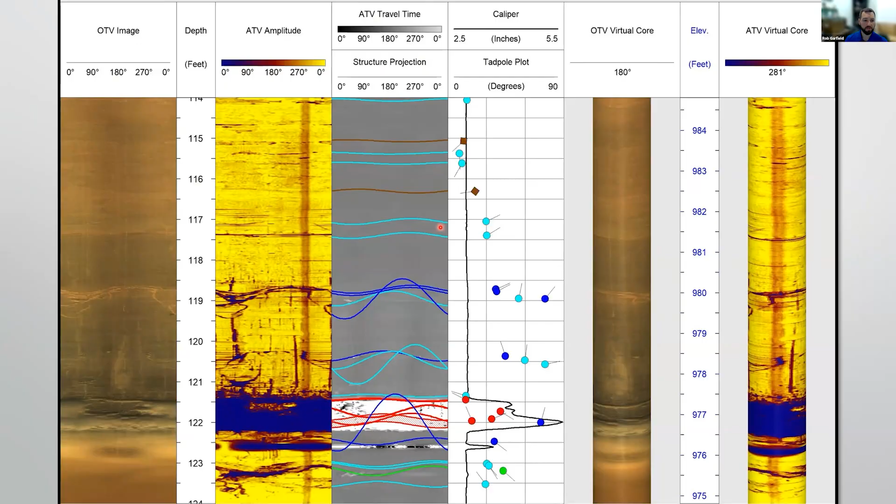This is another example of a very steep fracture that they kept on seeing in the video, and they lost 50% or more of the recovery, never mind the RQD being next to zero in some of these cases. But we came in with the televiewer data. We could determine the actual orientation of that vertical feature as well as the cross-cutting fractures that were causing it to rubbleize. And then zoomed out a bit further, this is starting to put together the idea of integration.

So now they have RQD and recovery from drilling as well as a description of the rock type, and we can plot that with the televiewer data and our orientation information. You can see how low RQD and recovery drop down here, right along that vertical fracture. Then it goes up a little bit where you only have this individual discrete fracture at approximately 86 feet. Then the rock type changed to a shale, and even though there weren't big open fractures, the rock itself was just much softer and broken up when they drilled. Again, they had low RQD, although very good recovery. We can characterize all of that with the in situ televiewer data.

There are many other things that you can measure using borehole geophysics, as I mentioned earlier, whether it's electrical properties, seismic properties, properties of the fluid, of soil, of rock. There are methods that can see through casing, but we could also measure flow.

One of the things not always characterized before construction: you look at the soil, you look at the rock, but if you know water is flowing through these layers, that can cause additional weathering. It can cause issues with mitigation of water at your site. So these are important things to know.

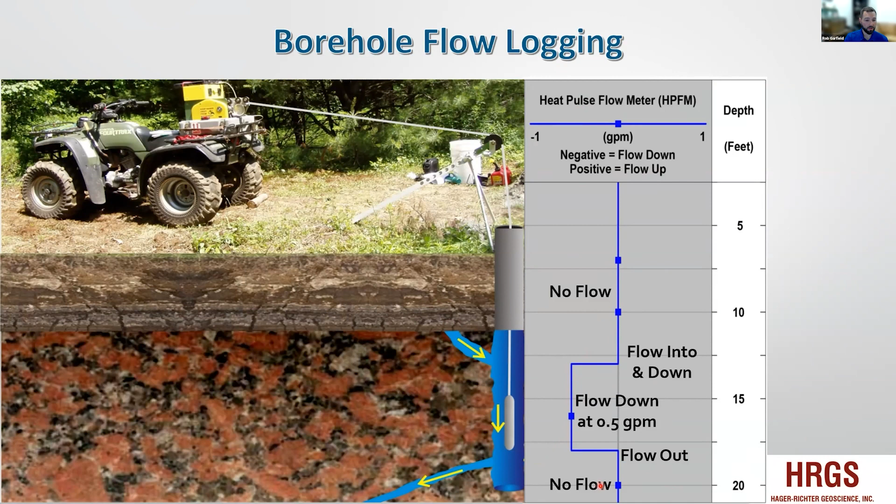Borehole geophysics can measure where there's flow going into and out of the material, and at what rate. One tool we use is the heat pulse flow meter, shown here, where there was no flow up in the casing. Flow came in through this fracture, connected to the soil, flows down the borehole at 0.5 gallon per minute, then flows out of the borehole. Again, at the bottom we have zero flow. That's what you'd put together for a heat pulse flow meter log.

What I really want to stress is the importance of integration, which I talked about briefly on Ohio DOT. Whether we're integrating borehole geophysics with MWD, with CPTs, with surface methods, or other traditional testing and lab testing, you typically have all of this data in different presentations, PDFs, Excel, different web portals, GIS, and CAD. The more you can integrate this information, the more you're going to get out of it.

So real quickly, I just want to show you what we put together as what we call an integrated borehole log. Don't feel the need to try to read all of this. I'm going to do some zoom-ins back in PowerPoint briefly, but I just wanted to show you what a full deliverable would look like.

This was done from a dam and roadway. It was an inclined borehole shown here with the stick up and the angle of the hole at 29 degrees. We show a site plan right in the header, and then we show all this rich data content.

This borehole was drilled with MWD. So we have the core locations, recovery and RQD, coring rate, bedrock description, drill mechanics including rotational speed and pull down pressure. We have fluid observations, including pressure, volume loss, fluid color, relative turbidity.

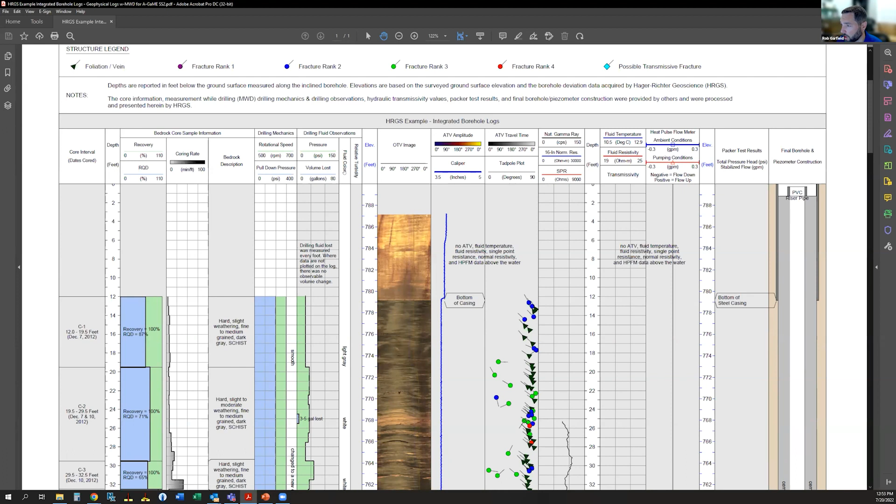We have many borehole geophysical methods, including the optical and acoustic televiewer, the fracture orientations. We have natural gamma ray and some electrical methods that tell us about changes in lithology. And then we have the temperature and conductivity of the borehole fluid.

We have transmissivity measurements taken by either packer testing or other continuous measurements, and the flow meter logging with the heat pulse flow meter. Finally, we have packer test results and a final well construction.

You can see here they wanted to put in a piezometer. So we show the construction, the grout, the sand pack, the piezometer placement, and all of this rich data content side by side.

So now going back into the PowerPoint, this is the MWD and drilling component. You can see there's some rich, great data content as was provided in the previous slides. We're in open bedrock, but how do we put all of this together?

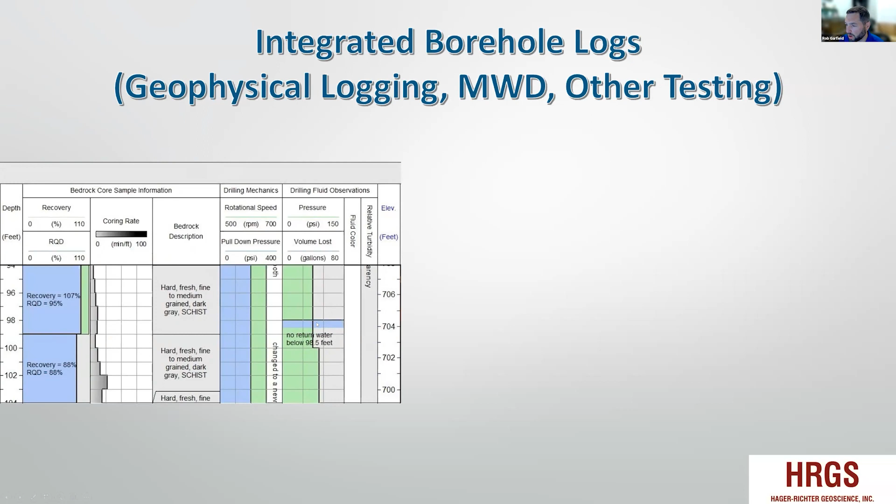What you can see here is there's a coring rate increase, so you assume maybe you have some fracturing. You see the RQD decreases. There's some description of the rock here. You can see there's this very large change in pressure and a decrease in the volume loss. So what's going on here? This is over such a short interval. Is this real? Was this just due to a mechanical issue during drilling?

Look what happens when you bring in and integrate the borehole geophysics with the MWD. Now you can see right where you had this pressure change, there is a near horizontal fracture that we had already identified from the borehole geophysics as a water-bearing fracture. There's an estimated transmissivity from some of the hydrogeologic testing, and we had flow out of the borehole under ambient conditions. When we pumped, flow came into and up the borehole.

So again, now we have a really rich data set just by integrating it. Instead of just having the mechanical measurements, we can now put that all together and understand the orientation of that fracture.

Here's another zone. You can see the coring rate significantly increases as you enter this zone, and then there's a very discrete change at 154 feet. I really commend the guys that did the MWD on this. They also took great field notes. They mentioned, hey, we had some frozen lines here, so ignore this data set. We changed the drill bit at 155 feet.

So this increase in coring rate wasn't just geologically controlled, it was a fresh drill bit. So you have to understand all these things rather than just looking at the measurements.

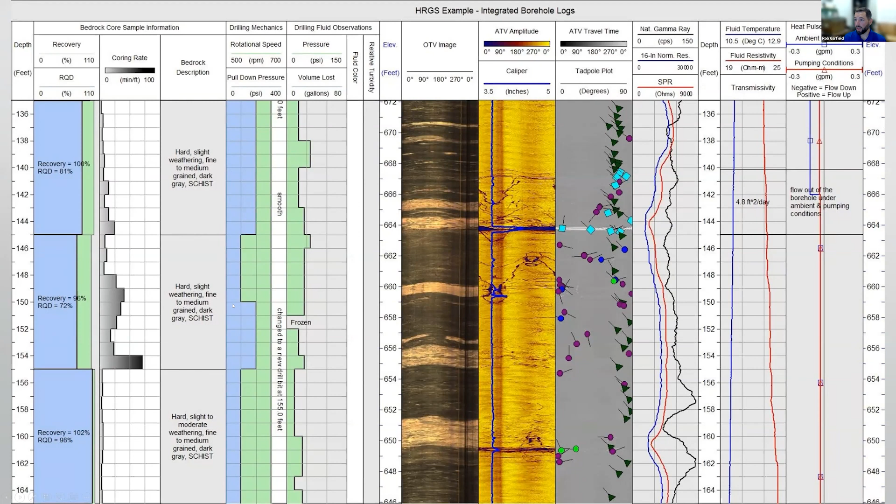And then again, you put it together with the borehole geophysics and you see you're in some weathered fracturing where the coring rate increased, it sped up. You can see you have some changes in the RQD and recovery and some of these fluid property changes at these fractures that were hydraulically active based on the borehole geophysics.

And again, just one more zone showing the same thing: increase in coring rate, decrease in RQD, changes in fluid properties, and again, a shallowly dipping fracture identified in the borehole geophysics. We know the orientation of it.

We know the transmissivity of that feature, and we're just really starting to put things together. And finally, again, a major decrease in recovery and RQD, large weathered fracture zone, and we have all the orientation of these features and an identified flow zone based on the borehole geophysics.

Bringing it all full circle, we come back and look at some surface geophysics. You're monitoring soil properties, rock properties, top of rock. You bring in information from drilling.

You do things in an iterative approach where the surface geophysics on a reconnaissance level shows you where to take CPTs, where to do drilling in MWD. You focus that further with additional surface geophysics and maybe borehole geophysics, and you start to pull that whole picture together.

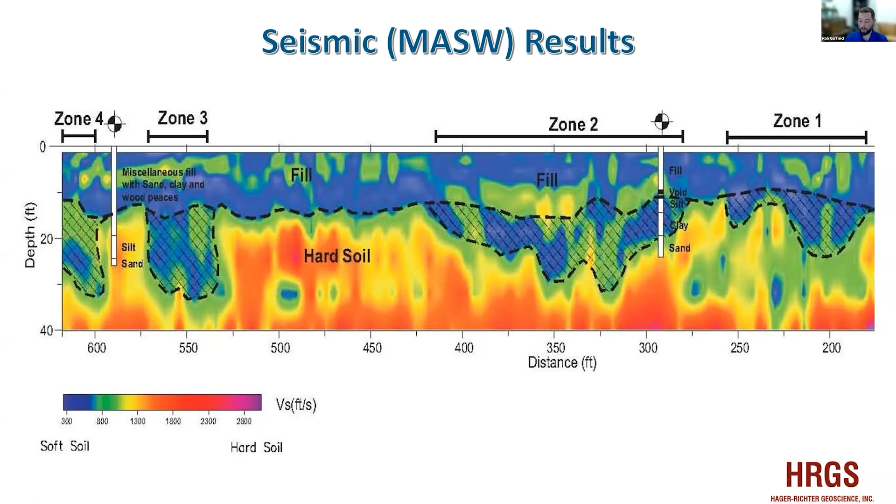Again, all this information, because you're looking at high resolution data, but you're integrating between boreholes now and introducing the information from conventional methods. Again, you could introduce ground truth from CPTs or MWD, and then you can also finally bring together things like borehole geophysics as well as surface methods.

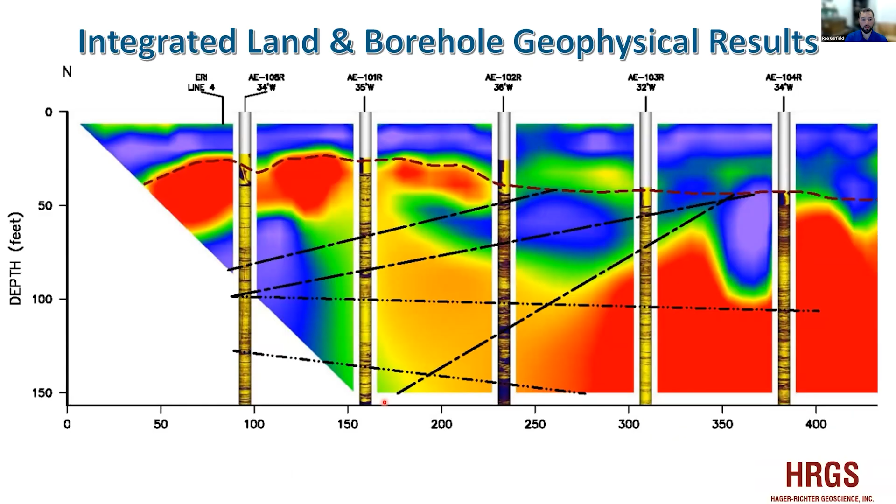This is an electrical resistivity plot shown behind acoustic televiewer data, and you can see where you have this large change in the electrical properties of the water and a fault where water is flowing. You can see each spot where that intersects the borehole, there's a large fracture of interest. It just brings it all together so that ultimately you're providing this information to the client, to the owner, to the DOT.

So that decisions can be made for design, for construction, and then you can continue that process during construction and look at things temporally to see how things change when construction starts and to monitor construction.

So again, if I've impressed anything upon you, all of these methods have their advantages, they have their limitations. You have to use it as a toolbox approach to get the most comprehensive in situ characterization of the subsurface, so that later you can apply them to projects like you're going to see in the case studies and presentations this afternoon.

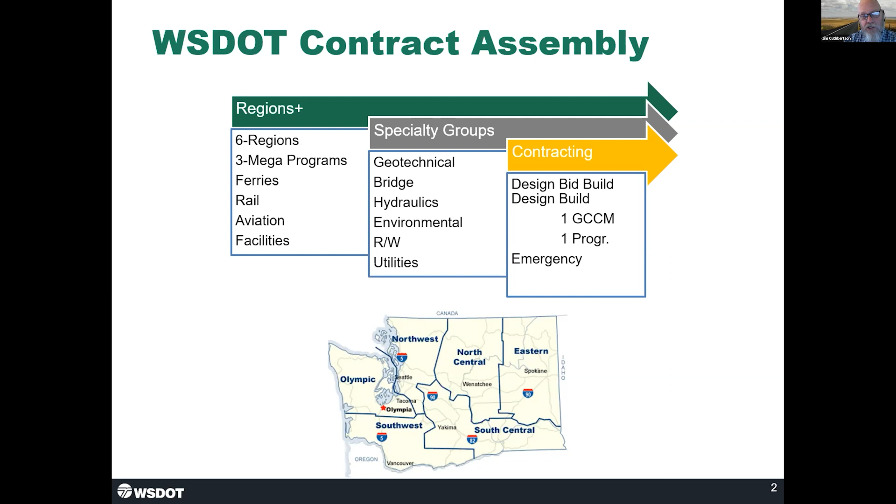We've done only one progressive design build project and only one GCCM, but we are looking to expand our use of both of those methods. And then, of course, we also do emergency design or emergency projects, flooding, landslides, things like that.

So in our contracts, we have a bunch of geotechnical information, and this morning's talk was about the geotechnical information that we collect. In our state, we have contractual geotechnical information and reference information. So I'll let Andrew explain the differences between those two.

Sure. Thanks, Jim. A lot of times it's about interpretation and also the quality of data. We have a collection, as most states do, of some great historical information from construction along our roadways, whether they're boring logs from the 50s, 60s, field records from the 20s. We've got a lot of great data.

However, things may have changed since that data was collected. The highway was built, or other developments may have occurred. So that's data that is useful for design, but it's not contractual level data.

We collect data for upcoming projects, data that is current, that has accurate X, Y, Z that we can place in space, and groundwater information from recent years. All of that information makes for great contractual data, stuff that we as the DOT will stand behind.

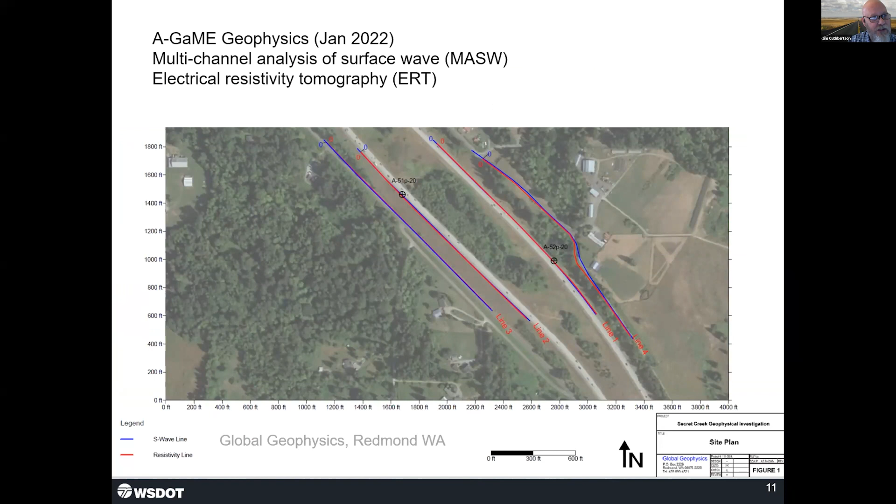So how did this progress as far as timing? February, we were doing preliminary drilling. September, we did a second round. In January, we did the geophysics. If we could do this as a do-over, we probably would have done the geophysics first and then planned the drilling. But that's the way that happened.

So what do we have for geotechnical information? I mentioned we have all those borings. Now this is what I wanted to talk about. We switched our method. We're going to be producing a baseline report and a data report. We've got enough information that we feel confident in identifying zones of soil prone to caving. We're confident we know where the difficult pile driving is going to be because we know where the till is now. So we can develop some pretty good baselines for the design builder to use in development of the project and in their bidding.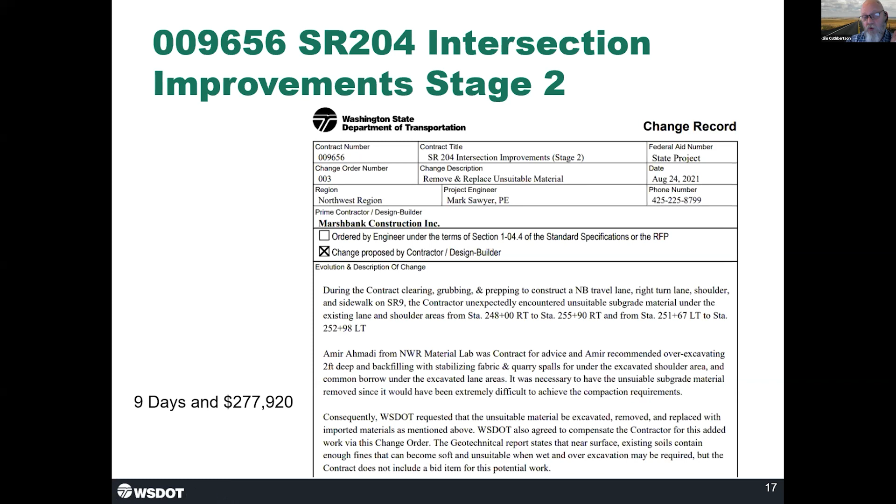One of the reasons why we elected to authorize this change order was we kind of had a contract error in that we didn't include quantities for removing this unsuitable material. So we identified this material, but we didn't include quantities for it. So let me talk about that.

So I mentioned that we have reference and contract information. In our contract, this is the section that talks about the reference information. We told this contractor that we have a geotechnical report, some piezometer data, and a stormwater general permit, and those are all referenced. So those are made available for their use, and any interpretation or use thereof is their responsibility.

We did have borings that were in the contract. This is an excerpt I grabbed out of the geotechnical report, which was reference, okay? The only reason I grabbed this reference figure was because it showed where we actually had borings and where the work was occurring. So some of these areas where we were having soft subsurface conditions, okay?

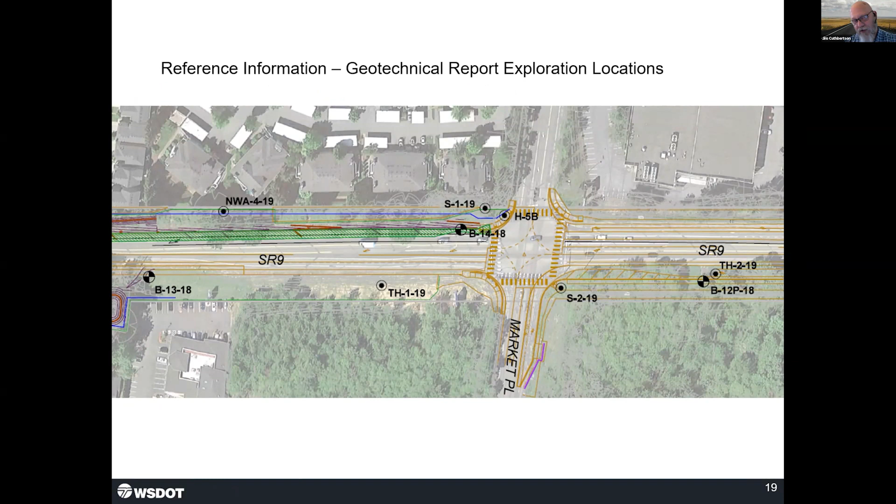So actually the borings that are in here are included in our contract as contract documents. But this exhibit, this aerial figure, is out of the geotechnical report, which is referenced. We also, in our state, produce a summary of geotechnical conditions, where we try to take the geotechnical information and boil it down into something a contractor could understand.

And one of the ones that we have, so this is what one of those documents looks like. I highlighted this for design, bid, build projects. This is for a design, bid, build project. So what we did say is throughout the project, there's near surface soils that have enough fines to become soft and unsuitable when wet. And so, Mr. Contractor, you better plan on encountering this material.

So in terms of our contract, we've disclosed these conditions to our contractor in the contract documents. We have geotechnical borings in the contract that show silty sand, 3 blow count, near surface, high water table, only 4 feet below the ground surface. So as far as we were concerned, the unsuitable materials they were encountering are not a differing site condition on this contract. But like I pointed out, we sort of failed to include the quantities for removal of that material, disposal of that material, importing the new.

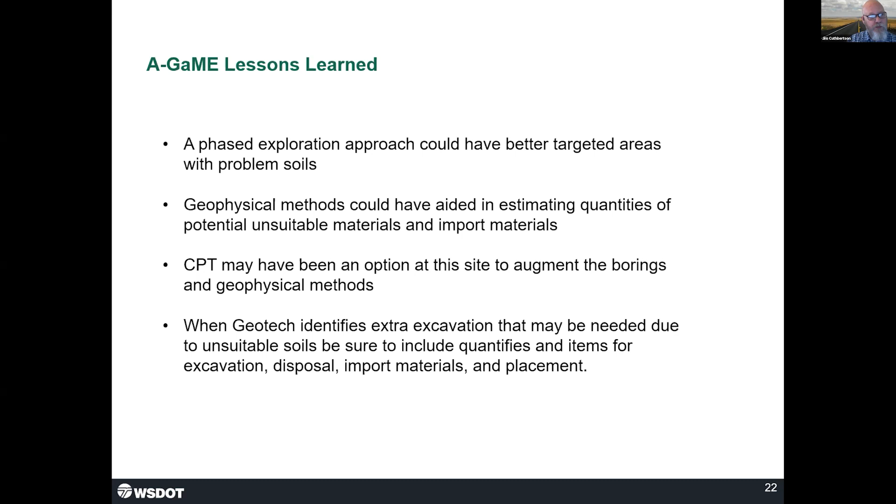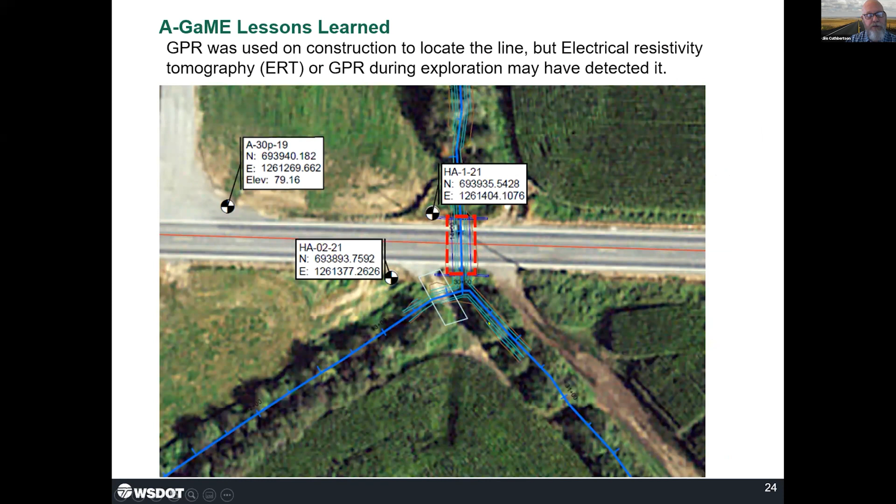Here's another one. This is just a simple, quick one. This was on a little $1.1 million contract. We issued a change order for $7,000. This happens to be a fish passage project as well, but there was a farmer that had buried an irrigation line we knew nothing about, and the contractor encountered it on construction, and we ended up doing some GPR to locate it. So this is just what happens to be in the contract. We had 2 borings. We were doing this basically culvert replacement job, this little $1 million job, and we hit this utility or irrigation line that we didn't know anything about.

So that was really all that I really had to present. So I am open. Andrew and I are open for questions, or Ben, you can just take it over. There is one in the chat.

What are the advantages to the department of including the geophysics report to the GDR? Is the question. An advantage of including the geophysics report would be providing contractual information that better defines the subsurface conditions for the project. We are opening ourselves, in my opinion, to a bit of differing site conditions claims if they were able to link the geophysics report and the conditions reported therein to something different that they found when they go out and drill or open it up.

So on that point, and I think you're bringing up something fantastic, great presentation, by the way, and a great lead into the discussion coming up here. You talked about GBRs, and it sounds like you're using GBRs exclusively for design build projects at this point. And we do have that thing called a summary of geotechnical conditions, and it's akin to a GBR.

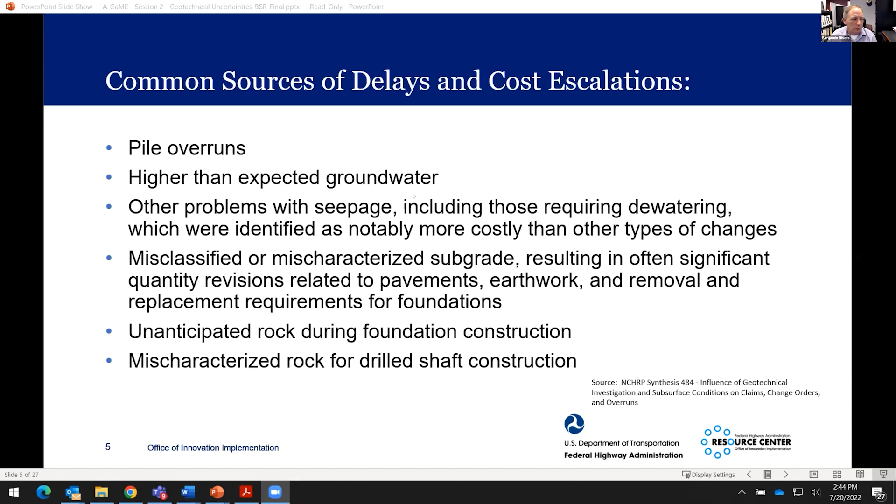But every ground condition is going to have its challenges, from running sands and silts to the compressibility, the time rates of settlement and setup, and poor pore pressure dissipation. All of those are elements that would be very helpful for contractors to understand before we get to bidding.

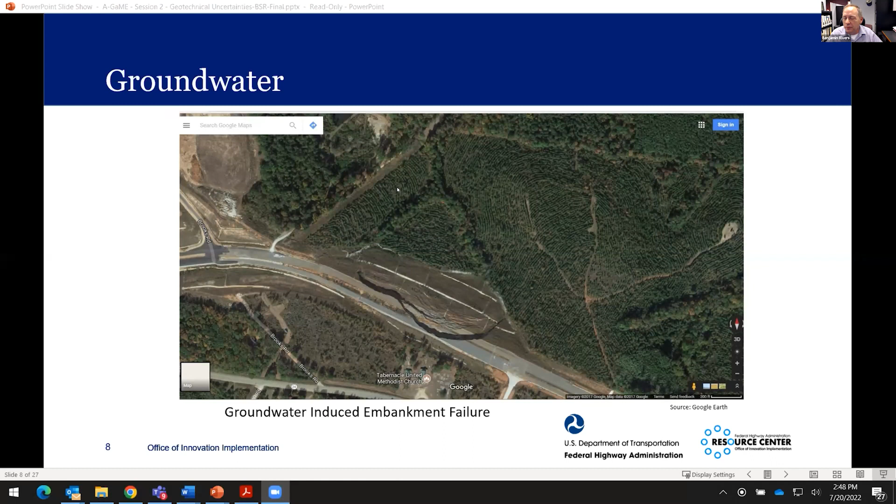But when you start digging into the reconnaissance type information and the desk review, and start looking at Google Earth for instance, you see this highly vegetated area, this wishbone type growth of trees—there's quite a bit of water, and it's been there for a while. Then you start seeing, digging a little more, springs. And then if you go into the hydrogeologic data, which in this case was actually very easy to find, you recognize quickly that this was an aquifer system, or around an aquifer system, that was daylighting in this area, along with other telltale signs of ponds and whatnot that would give you the heads up that we probably need to be looking at groundwater conditions here.

And you're seeing groundwater in this picture, if you can see my cursor. This is after failure, and this is standing water from groundwater flow. But this wasn't the case during construction.

During construction, talking to the construction engineers, they said they did not see signs that would suggest there was a problem with groundwater where they needed to put underdrains into the system. So that's the importance of actually doing the desk study and finding out the information with piezometers and other things over time, because it's pretty obvious that this was water driven, and you're seeing water right down from the scarp, where water's coming right out of the scarp.

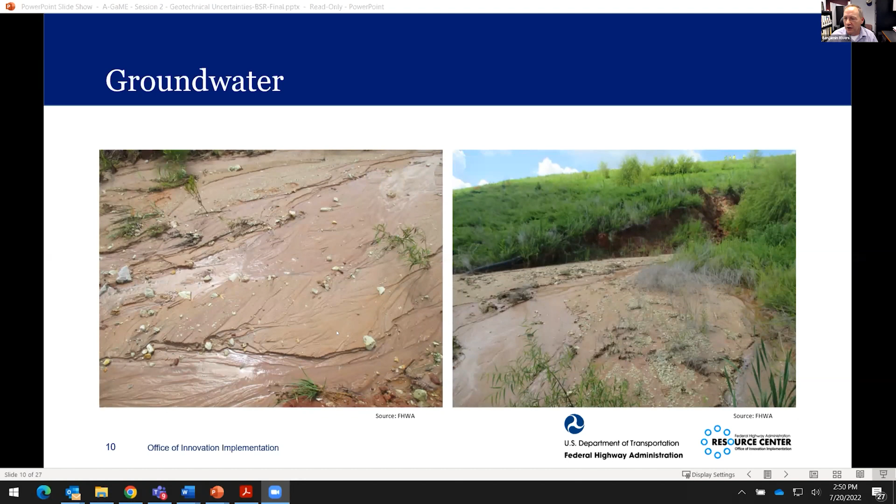This happened from the time the tension cracks showed up to the time there was a headscarp of 6 feet—it was weeks from occurring. So weak, compressible materials—not just weak, but we can have bigger layers of soft materials that cause problems with differential settlements on the performance side. Our contractors need to know this information for staging of embankment construction, if that's part of their means and methods.

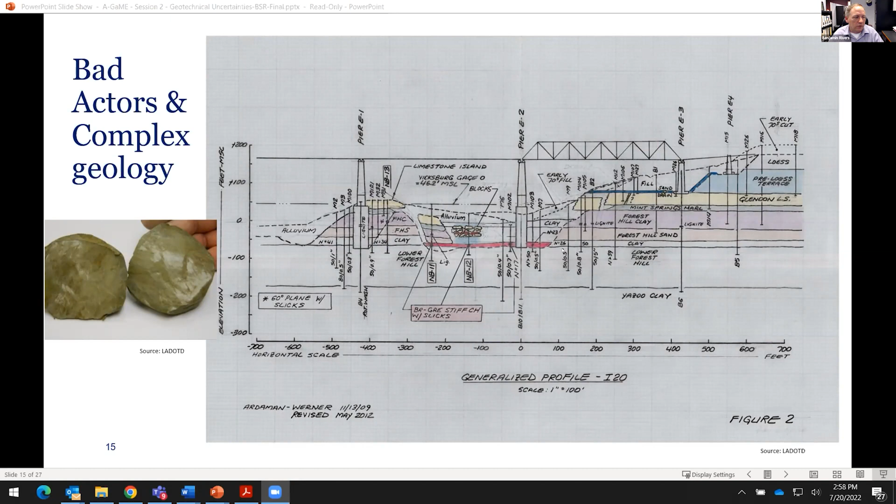Not an A-Game technology per se, but we always want to use the tools we need to determine what's going on here. In this case we've got very hard, very stiff materials, and we have this weak shear plane going on within them. If we're trying to push a UD tube in it, it's not going to work, and we can't push a cone—we can easily miss this with just about any other tool.

We need to sample this material, and a Denison sampler is the type of tool we can use, or a pitcher sampler, where we have a triple tube type core barrel offset so the cutting teeth are a little higher than the undisturbed tube, to get these types of samples that we can take into the lab. So don't forget the more fundamental methods we have as resources to solve our problems.

Rock, as I mentioned, is a big problem. Part of that is if I ask a geologist, a geotechnical engineer, a structural engineer, or a contractor what rock is, I would obviously get different answers. And that's because it's not a very easy thing—it's method or application controlled in many cases.

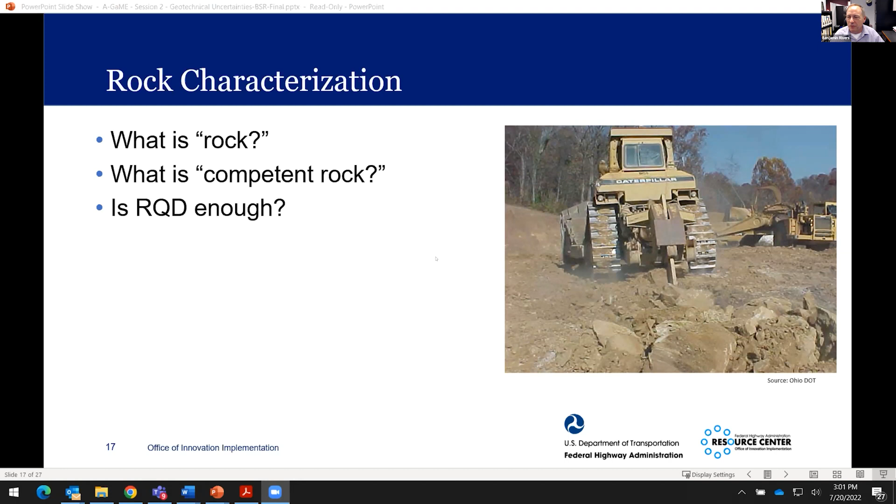This brings up the question of how we use pay items and terms like rock or competent rock. Very frequently I get that question—what is competent rock when it comes to a foundation, and where we place the tip of that foundation? It's specific to the geology and the areas we're in, and we could have very different materials across a site, even within the same site.

One lesson learned that I had personally—this goes back to the 2008-2010 era, the ARRA projects, if you remember, the Recovery Act type projects, what they called shovel ready projects. They were on the shelf, shovel ready for construction, and typically less risky in their nature as well.

This was a widening project, and I think it's reasonable to think that in most widening projects we're not doing a lot of construction—we're widening things out. In this case we had a cut, and the contractor was out there doing work, and at some point he started cutting the slopes back more than what was on the plans. That's when I got the call on whether this was justified.

The contractor obviously thought it was unsafe or unstable. So we went out there and looked at what the report said and what information was available. The report said, I think reasonably, that for this type of project where we already had cut slopes there, we knew what the performance was based on what we saw on the faces. The call was made that they were going to cut those back to what was actually done originally.

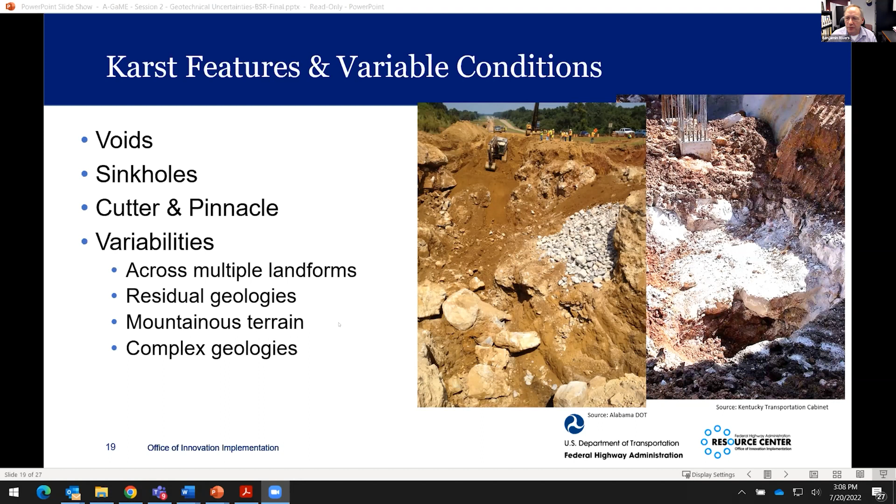This is pretty incredible, and this was close to the surface, but this could be further down in the profile. So there are a number of methods we saw earlier this morning, and we have the opportunity to improve the way we characterize conditions. I've listed a number of areas where we can do it, from the rock and the bad actors, and I'm going to walk through a few of these as we wrap this up.

On the excavation and rock characterization side, as I mentioned before, we have materials that vary from soft muck to hard ringing rock. What we call rock might have unconfined compressive strengths of a few thousand PSI to 80,000 PSI. And that's just one index that doesn't tell you anything about fracture frequency or faults or structure that are going to play a huge part in keeping a hole open during construction. So that brings back up the question: is RQD alone going to tell you everything you need to know? Obviously we have descriptors typically in logs that do have specific meaning.

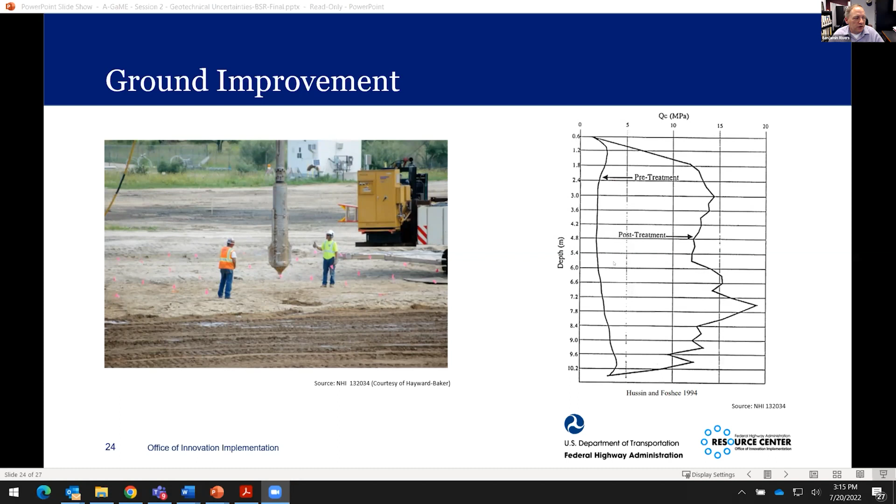So taking that from what we can characterize during geotechnical investigations before we get to construction and applying it during construction. In fact, a contractor can use that to inform them for those anchored systems on incline drilling, the same technologies. I haven't seen cases for it, but I'm sure that there is application there. I've heard of incline drilling operations using MWD.

Yeah, so we're back to just wrapping up things here. We can improve our investigations for these types of areas, characterizing rock, groundwater, variable conditions, and informing us for requirements during drill shaft construction, which is an advancement. We have methods, ways of counting blows when driving piles and getting an index, and resistance measurement while drilling is going to help us with that.

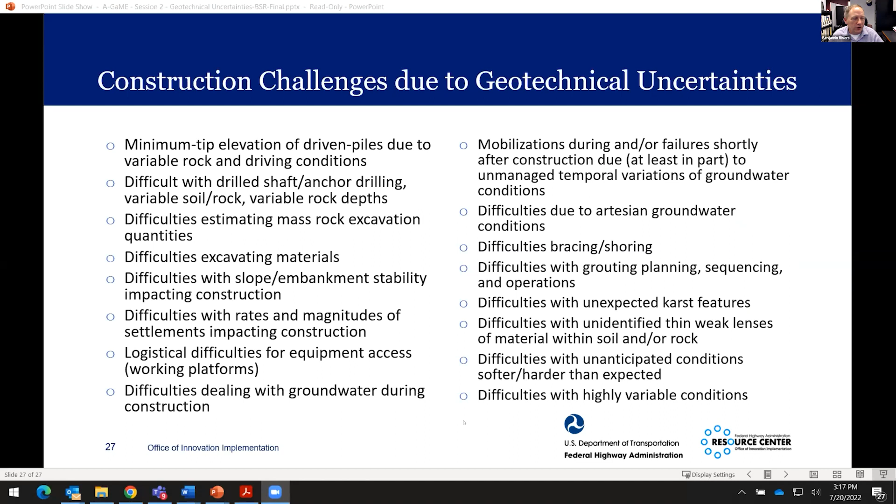I'm not going to talk about visualization or bidding. We're going to get into that in session 3, but wanted to push this slide to get you thinking about our discussion on the types of problems. You can take a screenshot of that, and I'll have the ability to pull this up later if we want to look at the types of challenges. There are a number of those, and in all of those cases, we have the tools to help us before we get to construction to remove a lot of those uncertainties that cause these types of problems.

So with that, I am going to switch gears. I'm going to ask if we could have all our panelists turn on their screens so that we can have a good discussion. And I'm going to pull up the intro slides here just to get us started.